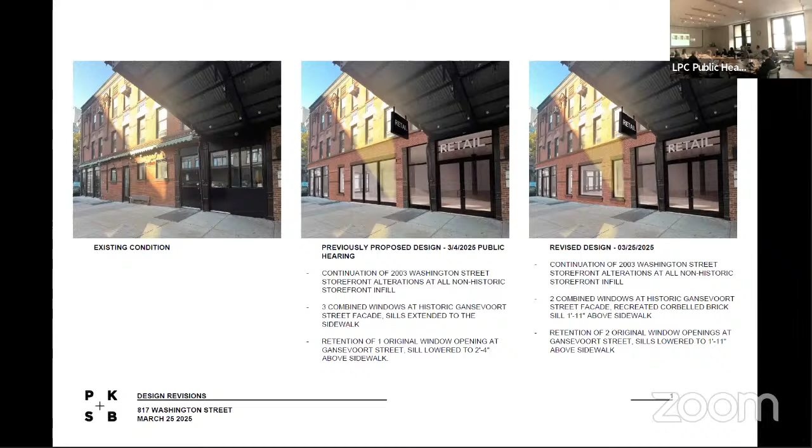We've revised the design per comments received from one of the commissioners at the previous hearing to maintain the 2 flanking window openings, so the heads and detail brickwork are all maintained, dropping the sill down so that it allows for us to retain the corbelling below the sill, and then combining the door opening and the remaining window opening into one display window, and restoring the corbel at the sill at that opening.

And just to quickly go through, again, the building is located at Washington and Gansevoort. And this is important because at the time the district was designated and created, Washington Street was a primary retail and commercial corridor in the district. It connected to 14th Street to a major store, which is no longer there. And the tenancy of Washington has diminished. And the space at the corner here has been vacant for 18 months.

And in the meantime, what you can see on the right side of the district, here is the district bid, and the city created a very prominent pedestrian plaza, which culminates at Gansevoort. And Gansevoort has now become the primary high-end shopping street. And so the purpose of this is to create an opportunity for that bigger tenancy at this corner and proper entrances and display, which match a lot of the other retail along Gansevoort to the east.

And so historically, this was a taller building, which had some commercial spaces and apartments above. This was originally 3 French flats buildings and was converted in the 1940s to commercial. Just again, showing the taller one. And this is during the period of the reconstruction. So you can see the open windows and demolition going on at the ground floor. And the corner, which illustrates the cast iron that was inserted here.

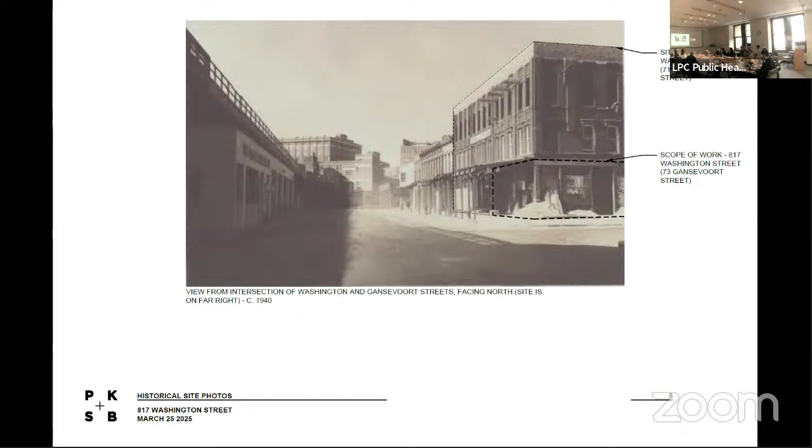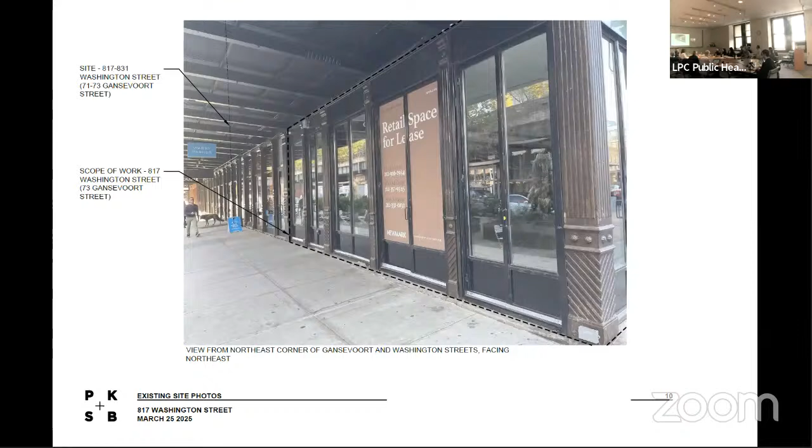And the side street, which tries to show much of what's along this side, and what was there with the roll down gates, which are gone, and the awnings, which are no longer there. And just to briefly comment, the Victorian Society at the last hearing made note of the exposed conduit. That, of course, is all being removed and located inside as part of this. And details, this is the storefront that's being removed. And this is the side of the building with the greatest scope of work.

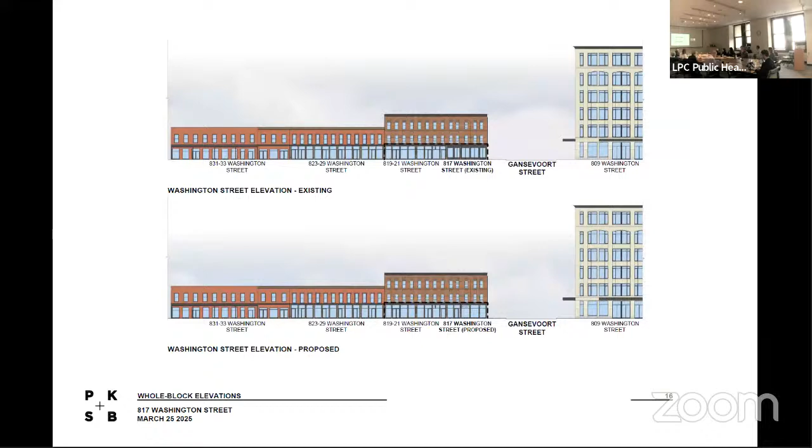There's a marquee. So here are the 4 openings in question with the high sills, the corbelling, the decorative brick between the openings, and lintels. And details of those elements. And the street elevation on Washington. This is what we're proposing, so it just continues what's already there. And on the Gansevoort side, this is the existing, so you can see in the marquee to the right, the infill and the openings, and what we presented last time, and what we are presenting today.

So we've tried to maximize the amount of historic material. We'll be able to maintain the 2 lintels and do a small piece of infill in between them to match at the head of the window, continuing the brick detailing below the lintel in the brick wall sections, and then combining what's already altered, the door, with the window adjacent and dropping the sills down with the corbelling detail. Plan. And this shows one of the reasons for doing this is also to allow for this space to be divided.

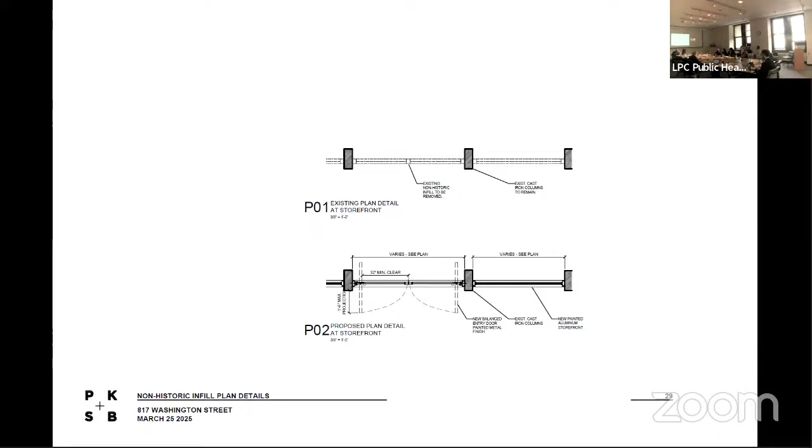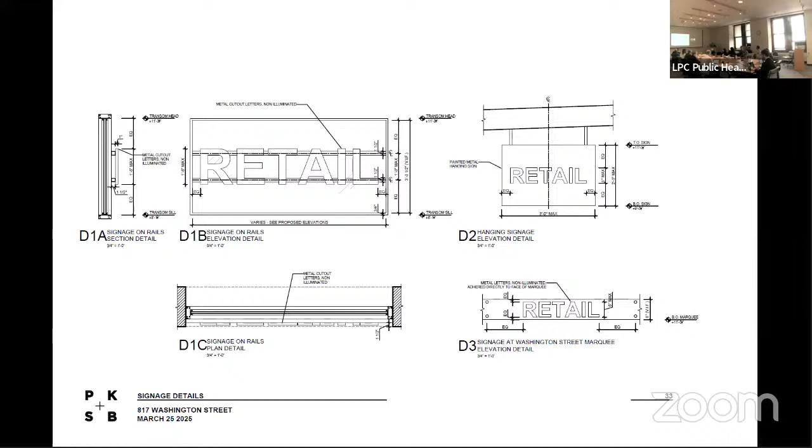And the details. So maintaining the position of the glass and bulkheads with respect to the outer brick wall. And the detail of the corbelling as shown in existing and proposed on the right. And the majority of the signage conforms to the rules. The signage proposed on the lower left is for pin-mounted letters on the front face of the marquee that faces Washington Street for somebody driving by. And this shows some of the other buildings in the district where larger openings have been made from smaller openings in the brick walls. That one was extensive.

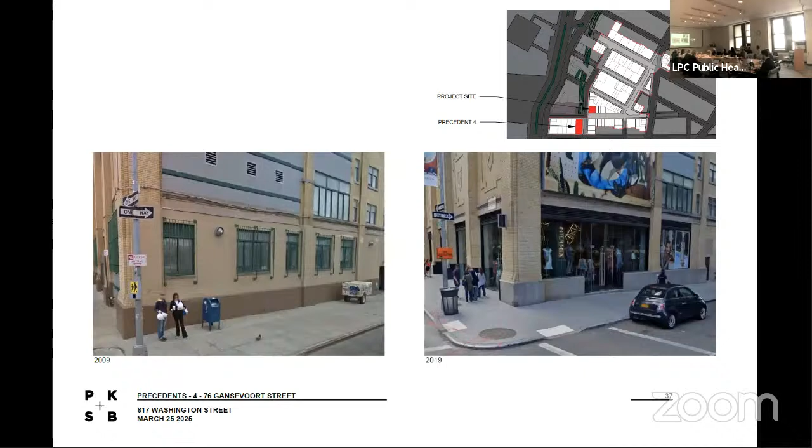And back to us. And this shows the pin-mounted letters on the face of the marquee facing Washington, and up close. And this shows what we previously proposed and what we are proposing today. Sorry for the little vehicle. Photoshop didn't do a good job. And what we previously proposed and what we are asking for approval of today. Thank you. Any questions, commissioners?

No? Okay. All right. I'll now note that Victorian Society of New York did send in a letter on the revised proposal, still recommending denial. So we just saw this last week, so it should be fresh in everyone's mind. And you may recall that there were some comments that the 4 openings should just drop their sills. And then there were other comments, one in particular, that was to drop the sill on the eastern bay to match the western one, and then combine the 2 center ones. And then there were some other comments that were open to looking at other options besides dropping the 4 sills and some variation of that.

And so the applicants are back today, dropping the sill of the eastern bay and then combining the 2 middle ones, keeping their outside line, their lintels, and inserting a piece in the middle. And all of them will have restored corbelling. And just to provide a little context on this particular district, many of you might remember when we designated this district, we recognized that the history of this neighborhood was about change, and that this neighborhood started as a residential neighborhood and then became somewhat entertainment and then industrial and then commercial and then ultimately the meatpacking district. And so through these various waves of reuse, the buildings changed dramatically, and they were cut down to 2 stories.

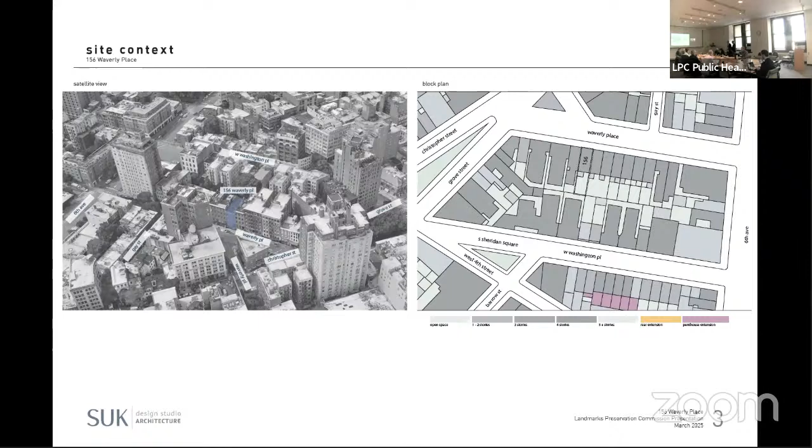Good morning, Commissioners. Anu Kandel, Preservation Staff. The subject property is located on the south side of Waverly Place between Grove Street and 6th Avenue in the Greenwich Village Historic District. This item was initially presented at the January 28th public hearing. The proposed work included installing a stoop gate, replacing windows, constructing a rooftop addition, modifying and reconstructing the rear facade, and excavating the cellar and rear yard. The Commissioners did not object to the excavation scope, but did express specific comments and concerns regarding the remaining scope. No action was taken at that time.

Starting at the front facade, the Commissioners did not object to the presence of a stoop gate, but expressed concerns regarding the design and height. In response to these comments, the historic railings and newel posts will now be restored and the gate redesigned to be shorter and match the reintroduced ironwork. Additionally, the windows were revised to a lighter finish, which is now being reviewed at staff level.

Moving to the roof, the commissioners did not object to the construction of a rooftop addition, but expressed concerns about visibility, as well as expressed objections to the glass railing. In response to these comments, the addition has been modified to address visibility, specifically sloping the roof away from the Waverly Place facade. Additionally, the glass railings have been revised to cable railings.

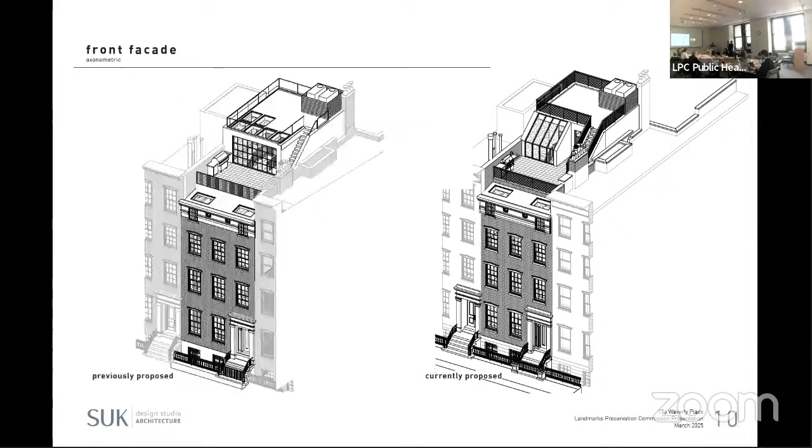At the rear facade, some of the commissioners objected to modifying the upper floor windows. In response to these comments, the fourth floor window openings will be retained. The third floor is still proposed to be modified as previously presented. Additionally, the proposal to reconstruct the rear facade at these upper floors remains as is. And the applicants are here to present the changes and answer any questions after we open the proceedings. Okay, great. Which I've already done, so you may go ahead and speak.

Hi, John Gordon and Bill Suk with SUK Design Studio. So we could start with the stoop gate. We were asked to change it as mentioned, but we found historic photos that were better quality and showed the pedestals that existed originally. So we're restoring that, and all of the railings on the sides of the stoop and the front were mismatched from the historic railings that exist on the areaway. So we decided to replicate to match that and be consistent with that historic photo we found.

And there's 2 or 3 other houses on the road that do have these pedestals on their stoop still. So we feel like it's a very appropriate change to the stoop. So this is the higher resolution historic photo we found, and you can see the existing condition with very mismatched railings, and then the proposal on the far right.

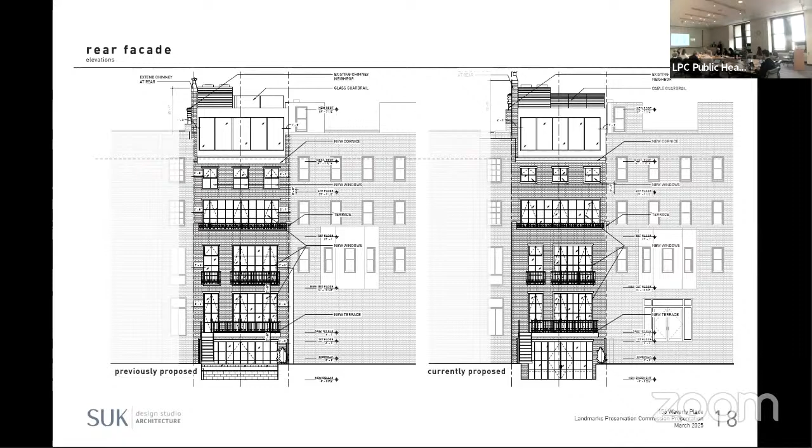So currently, we're proposing to maintain the masonry openings of the top rear floor to the 3 openings, while still keeping the proposal to make a wide opening at the terrace. And that's comparing what we were proposing here in January versus now. And rendering the rear facade, comparing the old rendering, the new rendering, plans.

And then as mentioned, the bulkhead has been revised for less visibility. We'll get into the visibility here in a second. So directly across the street, no real change there. It wasn't very visible. Here you could see the comparison from what we're calling view B, close to the end of the dispensary. You can see a slight bit, but the new mock-up is there on the top photos, and then the rendered and the blow-up on the bottom there.

And then this is comparing the rendering we proposed in January versus today's rendering. You can see the reduced visibility with that sloped roof. And then further back, just comparing the mock-up photo to the current mock-up, it's much less visibility. View C is further back, across the street from where we were in the previous view, so a larger vantage point. You can see the change in the visibility there.

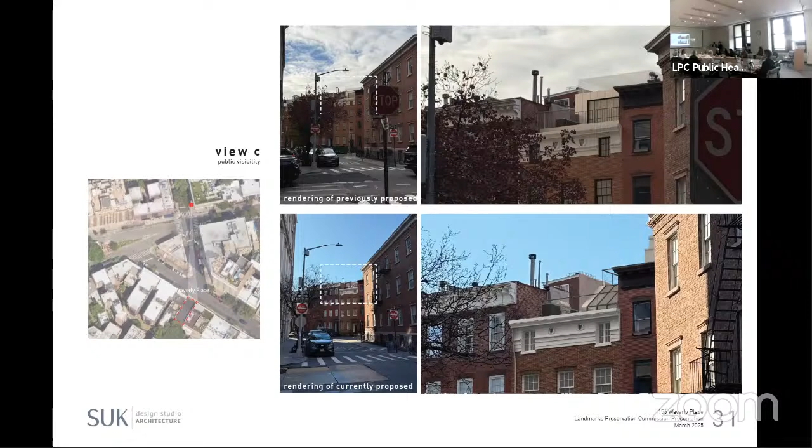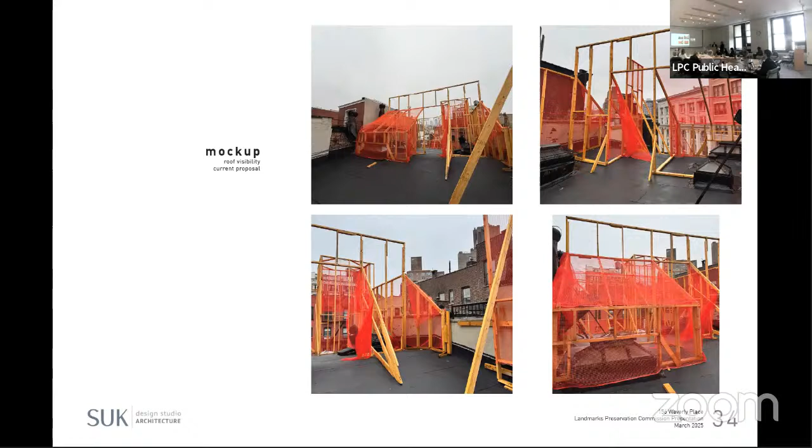And then comparing the old rendering from that spot to the new rendering, reducing the visibility quite a bit. And then the photo comparison from that spot of the mock-up to the new mock-up, old mock-up to new mock-up. And then there's no visibility really here from this angle. And then you could see these are the photos of the mock-up when you're standing on the roof, so you can see like the shape of it comparing to what we've modeled on the old mock-up.

Thank you. All right, thank you. Do we have any questions, commissioners? Yes, Commissioner Jefferson. I have one architectural question. In the rear facade, the front facade, the window frames are white. In the back facade, you made them black. And then you have the lintels that are white. And I'm just curious, why the change? You didn't hear me? Oh, it was hard to hear, sorry.

The question is that on the front facade, I know last time you proposed a black color and the commissioners all mostly felt that a white color would be more appropriate because of the cornice and the other details. And so the question is, on the back, you're proposing a black window system with white lintels, and what was the thought behind that? I think the lintels were intended to be like a masonry type material over the openings. So it's like appropriate with the brick.

So you're asking about the lintels? Can you hear me now? Yes. Yeah, okay, the question is, the window frames in the back are painted black and your lintels are white. And I'm just asking why the change, and the front frames are white.

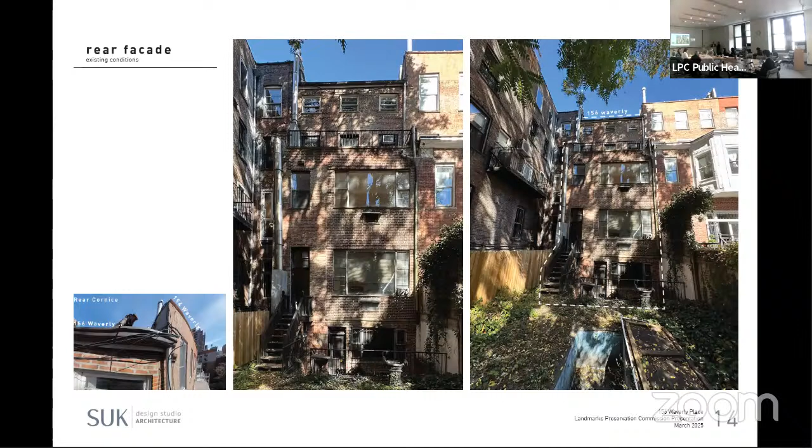I'm trying to understand exactly why the rear yard roof bulkhead is as tall as it appears to be, 12 feet above the new roof height, and it looks like it's mostly double height space. Is there a reason why that is installed? The main logic is you come up the staircase and then you come out the door, so you need height clearance at that area. And we just kept it as one roof for the whole thing.

So is the clearance there like 9 feet, and you have a 12? Yeah, it's 12 feet from roof level to roof of bulkhead. So is that like an 11-foot clearance? No, it's definitely not 11. So it says bulkhead, I'm sorry, bulkhead is 49.9 and so it's 10 feet. So yeah, we're being like a 9-foot clearance.

Is that the idea? I mean, the roof structure over the top on any of the roof structures we're adding, they're nearly 2 feet thick because we're doing lots of insulation and a foot of structure, and so there's a lot of layers to it. So it definitely comes down quite a bit. Okay. Thank you. Commissioner Master.

Yeah, can you speak to the front stoop gate? I think that you had said that you were trying to replicate the historic front gate. Is that true? What was your inspiration? Go back to that slide here. So the existing gate and the railings on the side of the stoop are not matching what's on the front of the areaway and don't match the historic photo. We feel the historic photo demonstrates that what's in front of the areaway was the historic. It's still there now, and we'd like to use that as our inspiration for the entire stoop.

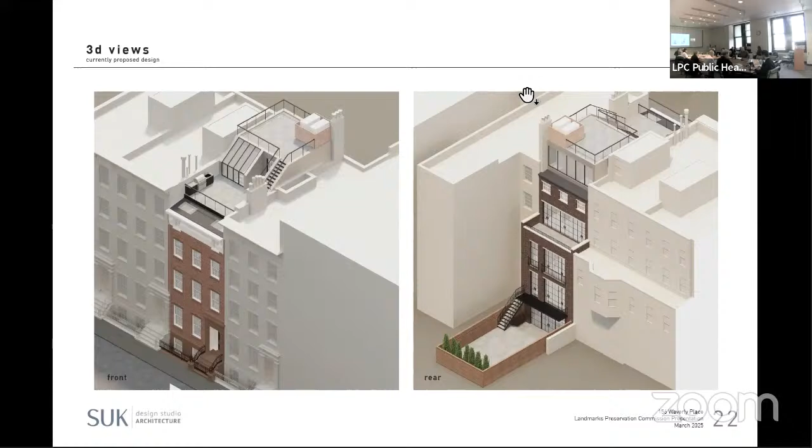Okay, Commissioner Jefferson, would you second that motion? Second. Thank you. Mark? Chair Carroll, aye. Commissioner Bland, aye. Commissioner Chapin, aye. Commissioner Chen, aye. Commissioner Ginsburg, aye. Commissioner Goldblum, aye. Commissioner Jefferson, aye. Commissioner Lutfi, aye. Commissioner Master, aye. With 9 in favor and none opposed, the motion passes. All right, please continue to work with the staff. We'll move to the next item.

Right, the next item is public meeting item number 3, LPC 24-08751, an application for a certificate of appropriateness in the Borough of Manhattan, block 1144, lot 105, 167 West 72nd Street in the Upper West Side, Central Park West Historic District. This is a store and apartment building originally built as a row house in 1883 to 84 and modified in 1909 by E. Wilbur. The application is to legalize the replacement of windows installed without LPC permits.

We read this into the record at a public hearing of March 11th, 2025. So this will be presented today for the first time, and the applicant will go through the proposal after we open the hearing. Okay, great. Thank you. Commissioner Lutfi, would you make a motion to open the hearing? Thank you. Commissioner Jefferson, would you second that motion? Second. All in favor, say aye. Aye. Any opposed? Okay, the hearing is open. Sorry, I missed. How do I?

Yeah. You can just use the keys to... Is the arrow? Ah, okay. Thank you. Thank you.

Good morning. My name is Alessandra Nehudil, and I'm here as the new owner and representative of 167 West 72nd Street. And I am here to request and propose that the current double hung 1/1 windows at 167 be legalized for the remainder of their natural life.

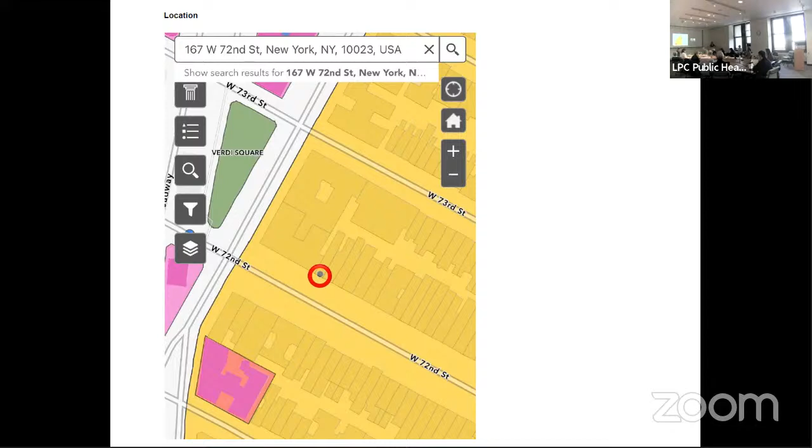This is the location on the Upper West Side. This is the Landmark West preservation designation. Sorry. Whoops. Okay. Missed a slide, but that's okay. And this is the Landmark West description. And here are some historical images. We have the tax photo from the 1940s.

And 167 West 72nd Street was originally constructed as neo-Grec, and it has been refaced a number of times. The current style of 167 West 72nd Street is not clearly identified in the Upper West Side Central Park West designation report, though preservationists today have approximated its architecture to be close to 20th century commercial and neo-federal. However, if you look up the property on Landmark's preservation website, you will see that it still is categorized as neo-Grec, which is important to me because 1/1 windows are appropriate for neo-Grec architecture and designations.

From the designation photo, it is apparent that the 5th floor, is this the right window? Here we go. From the designation photo, it's apparent that the 5th floor has had double hung windows since at least 1990, the top floor. And if anyone is familiar with, oh no. Oh, this is my old, that's why. I had sent a new, that's okay.

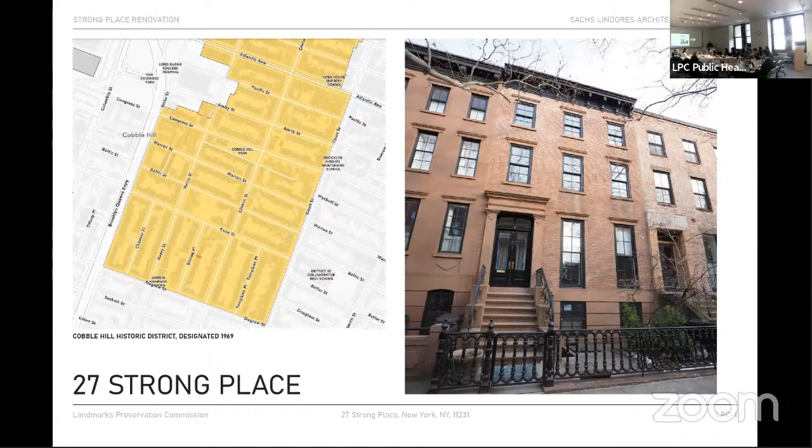A view along the streetscape: 27 Strong Place is near the center of the photograph. It was constructed in the 1840s. The designation report doesn't have precise dates, but from a variety of sources, our understanding is it's late 1840s. And it was built as a row of 3 houses, 27, 29, and 31 Strong Place, which were built together. The buildings to the left, the brownstone-clad buildings, were built a bit later.

A summary slide here, axonometric on the left is the existing, on the right is the proposed, and a few things to point out to you. So the scope of work that's before you today is replacing the 2 leaves of the front door, which are worn, and you'll see there's some detailing that has led to their degradation that we're looking to replace. The historic transom would remain. On the roof, we're proposing a setback rooftop addition, 1-story addition with chimney extensions clad in brick, and you'll see in a bit in the presentation these visible brick-clad chimney extensions are actually quite characteristic of the streetscape, and the addition.

And I'll just point out that the house two to the south, which is 31 Strong Place, had a very similar scope of work on the roof, rooftop construction, chimney extensions. That was approved by the commission in 2022 and constructed, I think, in 22 and 23.

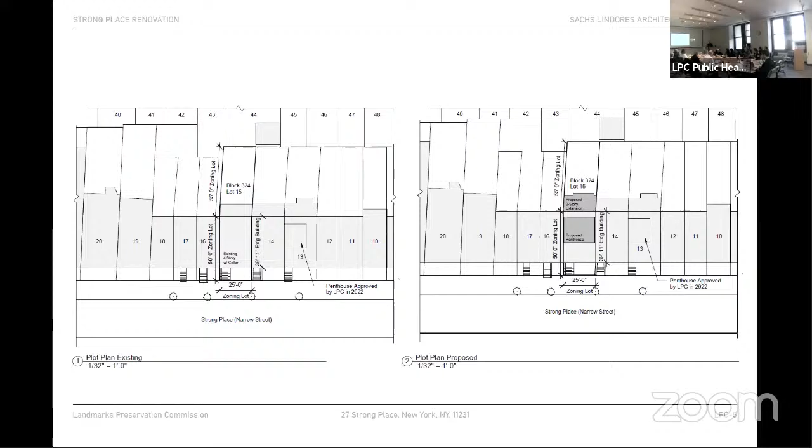A site plan, a couple things to point out here. One thing to note, not only the sort of irregular geometry of the lot, but these are deep lots. The ones including 27 Strong are 105 feet deep, somewhat deeper than is typical. And then you can just see the footprint of the surrounding buildings in the row, and a block plan later in the presentation will show you the sort of prevalence of 2 and even 3-story extensions.

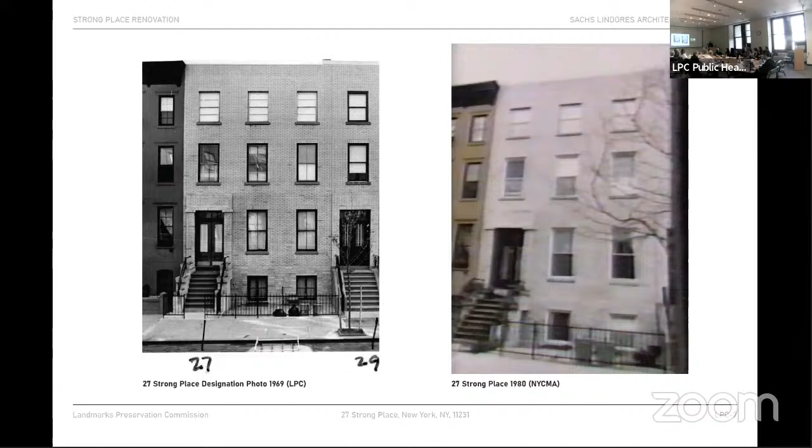Some historic maps just showing the development of the block. You can see sort of through the 19th century, the block was filled in with a series of row houses, as is typical for the Cobble Hill Historic District. And the tax photo on the right shows the building in its condition approximately 100 years after its construction, largely intact. At the time of designation, the front of the building had been overclad in a light-colored brick, same at 29 Strong Place. And then the 1980s tax photo on the right shows the same condition, stoop remaining, but the overall facade had been overclad. And all of that was taken back, and the facade was restored about 25 years ago under staff review.

And some photographs of the existing building as it appears, overview on the left, details of the upper portions of the facade, and the areaway on the lower right, so you can see the current conditions of the house. Roof photos, skylights, vents. You can see the chimneys on both sides of the house are masonry clad. And then looking, this is the view from the south. This is the addition at 31 Strong Place. And there were chimney extensions in metal that were approved as part of that commission approval from a few years ago.

Turning around now to the back of the house, again, 27 is in the center of the photograph. The 3 historic buildings in the row were 29 and 31. You can see 31 has been completely rebuilt. The back of that house, too, previously was clad in stucco, as is the back of the house at 27 and 29, all with 2-story extensions off the back of them.

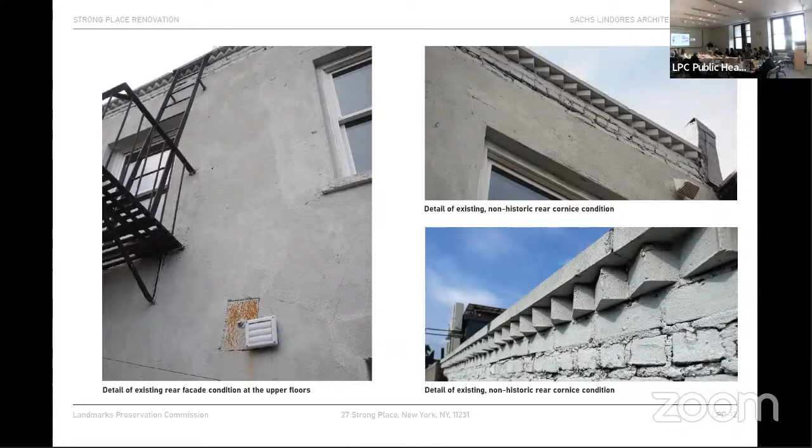And some detailed photographs of the back of the house, a fire escape ladder off the back, second and third floor onto the roof of the extension. And you can begin to see some of the realignments of openings that have been made over time on the back of the house. Some details here: cracking, reconstructed parapet with cast concrete coping. Window alignments on the second floor in particular that have been altered, but we have a good sense of where the historic openings were, both from the building at 27, but also from its neighbors at 29 and 31.

Comparative street elevations, again, the replacement of the two leaves of the front doors, which we'll talk about in just a minute, a modestly scaled addition at about 9.5 feet from the roof level to the roof of the addition, and the raised chimneys seen in elevation. Turning to the door, so the existing two leaves of doors, you can see the mail slot was cut through the bottom rail of the left panel, and the proposal is to basically replace the doors in kind in wood, but to insert the mail slot on the taller, heavier bottom portion of the bottom rail.

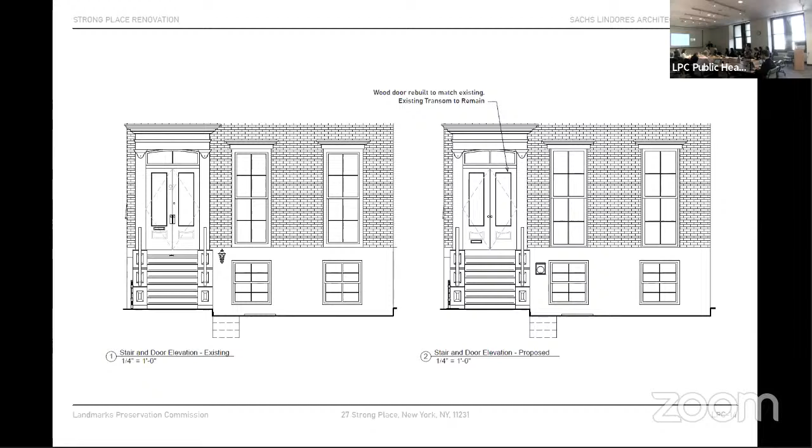The transom will be retained. We've got details illustrating the sort of one-for-one nature of the replacement. Some photographs. The transom, as I mentioned, will be retained, and the two leaves of the doors will be replaced with a mail slot set at a slightly lower elevation on that left panel. Some detailed photographs just showing the wear on these doors and a desire to have sort of clean, fresh, better quality or higher, better conditioned doors with that mail slot a little bit lower on the panel.

Flipping around to the rear, so an existing elevation on the left and proposed on the right. As I mentioned, the upper floors would be reconstructed in brick. We've got a sample board here with a brick and mortar that's proposed, cast stone lintels and sills, the addition above, and then the reconstructed two-story extension at the lower portion, sort of a lower basement level, and then a parlor level at the back of the extension.

Same elevation with dimensions. The dimensions of the masonry openings will be consistent with what's there today. We've added the dimensions in to indicate the size of the openings, the placement on the elevations that will be consistent from what is there today to what is proposed. And then the extension below. The windows on the upper floors will be in wood, double hung. The windows in the extension will be steel, painted in accordance to the finished samples here.

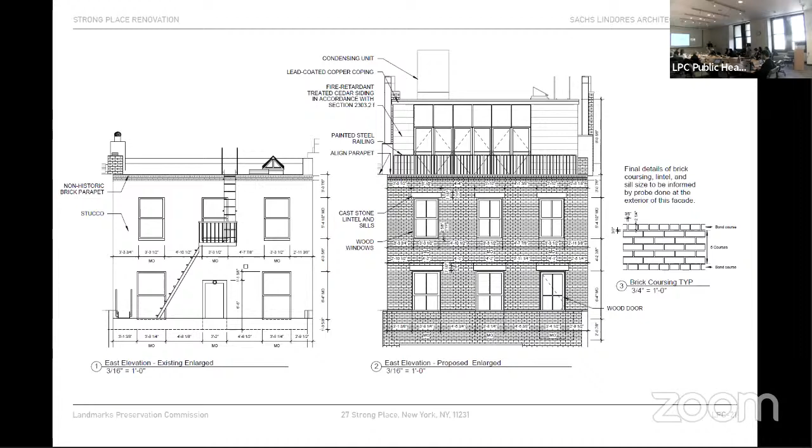Again, some details on the upper portions of the facade indicating what we anticipate to be the historic bond, which is just a common bond. We'll uncover that when we peel back the stucco off the back doing probes. But again, you can just see the regularity of the elevation, common bond, red brick with cast stone lintels and sills in the addition above. Some details at the base of the building, again, steel windows, painted spandrels, and brick elevation, heavy brick piers framing the openings and giving it a real sense of substantialness.

An existing section through the building, the heights on the front of the house and the back of the house are unchanged. I'll just point out the slope of the roof and also the height of the room in the back of the top floor. At 8'3", there's not a lot of head height at that elevation. We're rebuilding the roof to set the addition down into the body of the building, but we can't push it down much further because of the head heights. We're already reducing that by about three inches, just given the arrangement of the rear elevation.

So again, the back of the house remains at the parapet at 39 feet 4 inches. The overall height of the addition is 9'9" with an interior height of 8'10", and it's set back almost 17.5 feet from the front of the house and about 5 feet off the back of the house. So the historic volume of the building is clearly legible. And then you can see at the base of the section, the extension of the building off the back of the house with a limited amount of excavation directly below the extension.

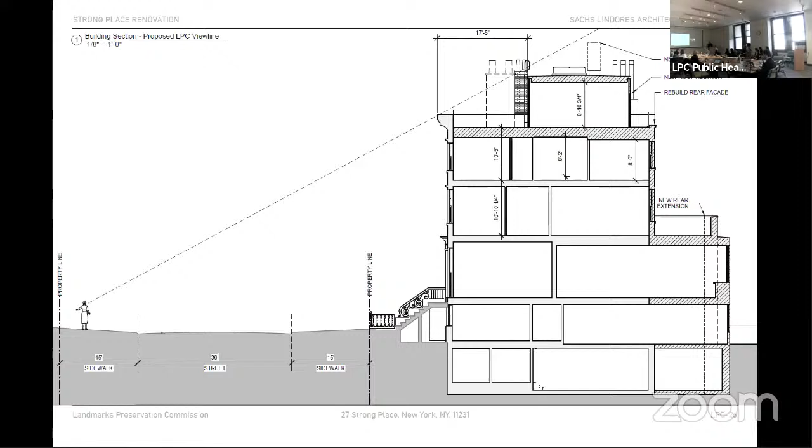Sightline diagrams just illustrating the view from across the street. The proposed sightline just illustrates that the tops of the chimney extensions are visible. The addition is not visible. The rooftop mechanicals are not visible. The only element that's visible from across the street is the top of the chimney extensions. Some detailing of the addition. It'll be in a fire-retardant cedar finish as per the material board. Infill will be steel and glass windows and other details illustrating the lead-coated copper coping.

A series of details here of the back extension, the brick cladding across the back of the elevation of the building, the corbelling across the top of the elevation. As we know right now, the corbelling that's there today is non-historic. It's clear from the materials and the detailing. It's a sort of dogtooth detail. The detailing at 31 is a sort of more regular dentil-like corbelling. We're proposing sort of a combination of the two.

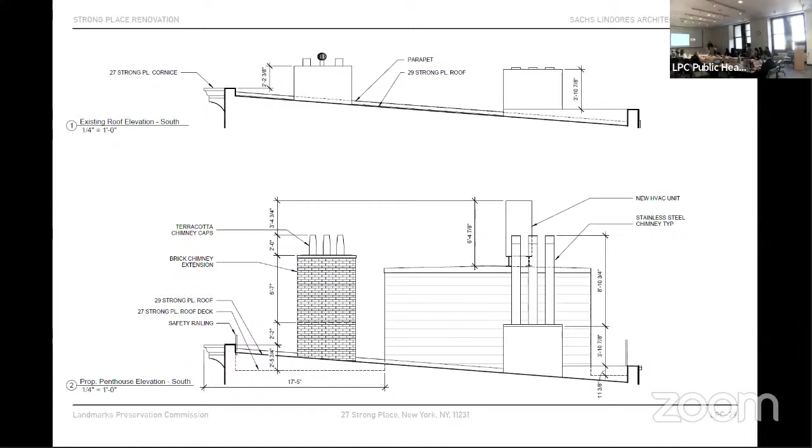We don't know what was there historically, but we feel like this is an appropriate design for brick corbelling across the parapet at the back of the elevation. Some comparable elevations at the roof, just illustrating the various elements, the chimney extensions. The chimneys at the front of the house would be clad in brick. Those in the back would just be pipe or chimney extensions, just the metal extensions, and then you can see the scale of the addition with its setback from the front of the house.

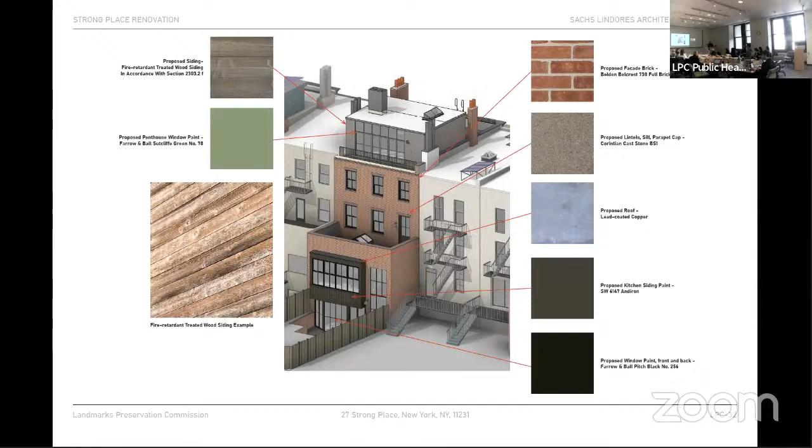Flipping around to the other side, similar details and elements on the roof, and then material samples, terracotta chimney caps, a Belden brick for the cladding of the chimneys, and then various cladding materials for the rooftop elements and finish for that. Flipping around to the back, similar set of materials, Belden brick across the upper portions of the facade and the extension, cast stone for lintels and sills, and color samples for the windows and the infill elements.

Sightline and visibility studies. This is a view of the building. So this is directly across the street. On the left is the view with the mock-up. On the right is the rendered view. And as I mentioned, the chimney extension will be visible. It's clad in brick with a terracotta chimney cap.

And then as you move up and down the street, this is now looking south down Strong Place. Mock-up view on the right and rendered view on the left. These chimney extensions are visible, but as you'll see in just a moment, this is actually almost a character-defining feature of the district. You see this quite a bit up and down the streets.

This is a view looking north now on Strong Place. So just through the trees, this view will disappear soon. This is the extension of the chimneys here. These are the commission-approved metal extensions as part of the 31 Strong approval from a few years ago. We think actually that the brick is sort of more sympathetic to the streetscape and what you see in the immediate area.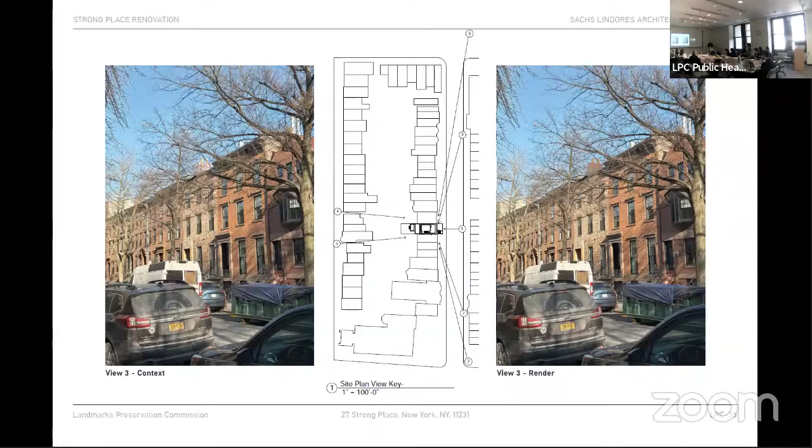This view now looking north from DeGraw, again, it's visible through the trees. We included it because you can see it from this perspective, but very difficult to discern. Similarly, looking south from Kane Street, you see this through the trees, but part of the streetscape.

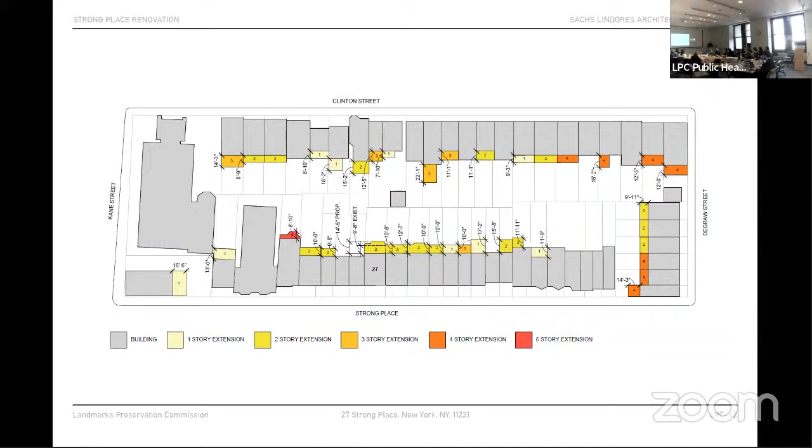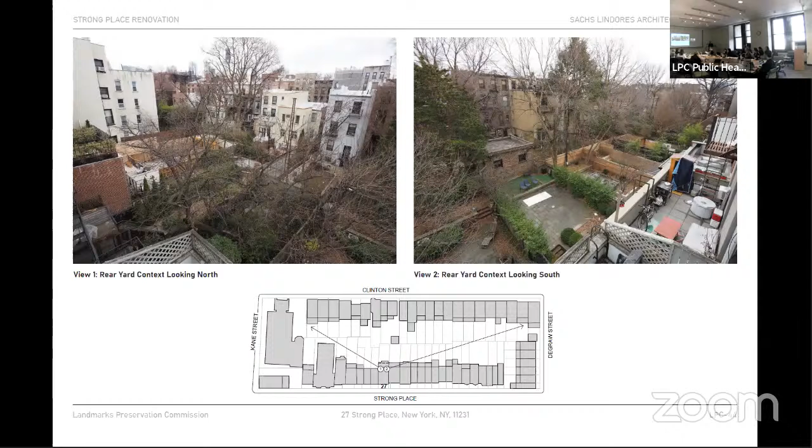Photos from the roof, again, just illustrating the range of extensions off the back of the house. So this is existing view looking north on the left and south on the right, and then kind of an overlay here showing what the heights of those relative extensions are off the house. So the 2-story extension we're proposing is very much consistent in height with what's around. As I said, there are 2, 3, and 4-story extensions throughout the block.

And now just a series of plans at the cellar. There's a bit of excavation work underneath the extension. We've been working with the staff on that. That's not part of the commission review, but we share it with you here.

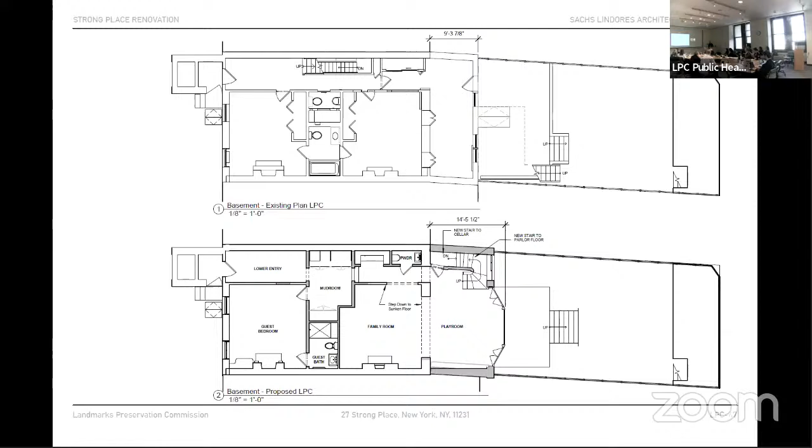And then a plan at the basement level, so you can see the reconstruction of the extension a few feet deeper than the existing, but in proportion of the overall lot, again, I mentioned it was 105 feet. In proportion of the overall lot, there's still quite a bit of green space in the back of this lot, and then throughout the block, given the extensions that exist.

Detail roof plan, and then finally, just to conclude, proposed axonometrics on the front and the back of the house. The addition, as I mentioned, is not visible from the surrounding streets. The chimneys are typical of the district. And then across the rear, reconstructing the upper portions of the elevation in brick, aligning it with the adjacent buildings. The windows will align as they do today to sort of establish and maintain that relationship between the 3 houses

across the historic row. And then the rear extension clad in brick with painted metal and steel window infill, proportionally appropriate for the building. Slightly deeper than its adjacent neighbor, but we think in the context of this deep lot can be appropriate. And I think collectively, rebuilding the back of the house will ensure the building's long-term preservation as part of this overall project.

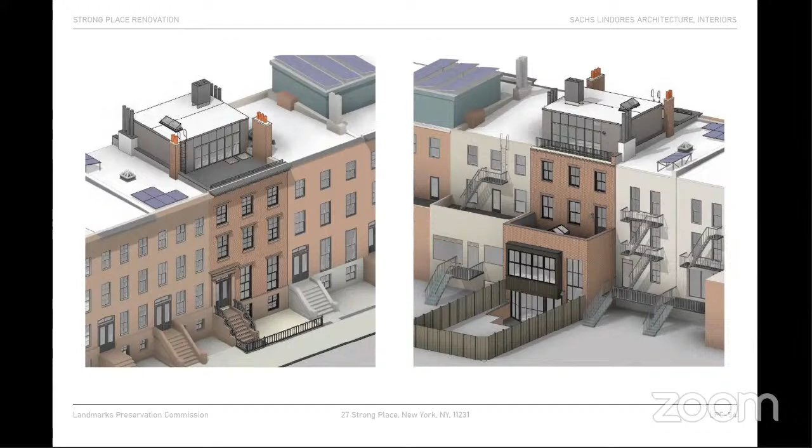Hi, Commissioners. My name is Lucy Levine. I'm speaking on behalf of the Historic Districts Council. HDC believes that the depth of the proposed rear extension should align with its neighbors. Thank you. Thank you. Anyone else joining via Zoom who would like to speak, please use the raise hand function. Seeing none, I will note that Brooklyn Community Board 6 recommends conditional approval provided that the rear yard extension matches the depth of the original extension and for the HVAC units to be smaller.

Okay, thank you. Would you like to respond to the comments? Just quickly, regarding the depth of the extension, I think what's important in terms of maintaining the continuity of this row is up at the upper floors of this building. The second and third floors, and that consistency now in brick, but also the alignments of the windows and the size of the windows, that relationship is clearly established by the work on the upper floors. The commission has allowed variability in design and geometry and volume to extensions.

This first level of the extension, the basement level, much of it is actually hidden by the fence because much of it is below grade. As we mentioned, it's a 1'10", 22-inch difference. It makes a difference to the layouts of the interior. Obviously not your purview, but thinking about appropriateness, thinking about the relationship of the houses, these upper floors really maintain the reading of the historic volume, and some variation in the extension could be found appropriate based on different designs and needs on these working sides of the lower floors of the building.

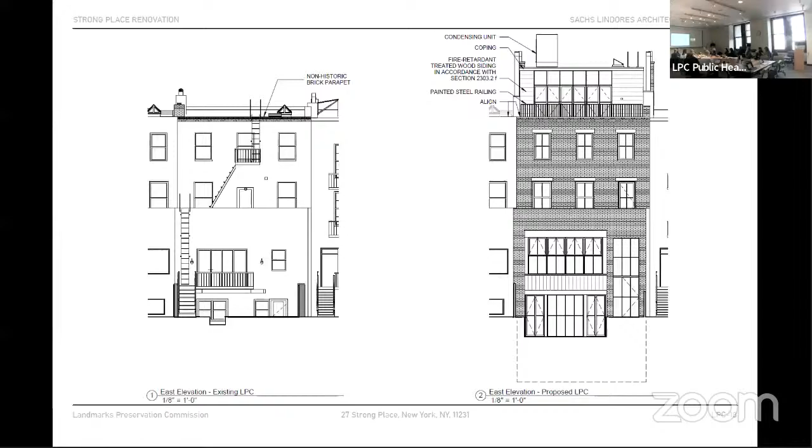PC-18. The rear facade, I think you did a great job on the rear facade. But the bay window coming out at the basement level, you have the walls cutting in, and then on the parlor level you have it flat. And then on the right-hand side, you have this window. And the composition just falls apart for me there for some reason. I mean, that's not our purview, but I'm trying to figure out how you would fix it.

Sorry, let me just go back, and I may have Kevin, because this is Kevin's design, but I think it's really about bringing daylight into the interior. Again, the lower portion is at the basement level. Kevin, if you want to speak to the ideas behind it. So that's where the stair is. We moved the stair back there, and we wanted to bring the window up, so when you walk in the front door, you look out, you get that sense of light in the back. That's why the window is as tall as it is.

But I also think the house 2 buildings over has something similar, right? Doesn't it also have a vertical window? It's very tall at 31. Yeah, here, let me, we have this in the elevations, right?

Oh, I see. It's, I mean, brick. Yours is better in a way, but it's not there yet, but this is just my opinion of design. All right. Other questions? All right, let's move to our discussion.

Commissioner Goldblum, would you make a motion to close the hearing? So moved. Commissioner Ginsberg? Second. All in favor, say aye. Aye. Any opposed? All right, the hearing is closed.

So we're looking at this application for a rooftop and rear yard addition. It also includes reconstructing the top 2 floors, for which we've received an engineer's report explaining need and methods. And I think it also includes replacing the front door as well, right? Okay. Vice Chair Bland?

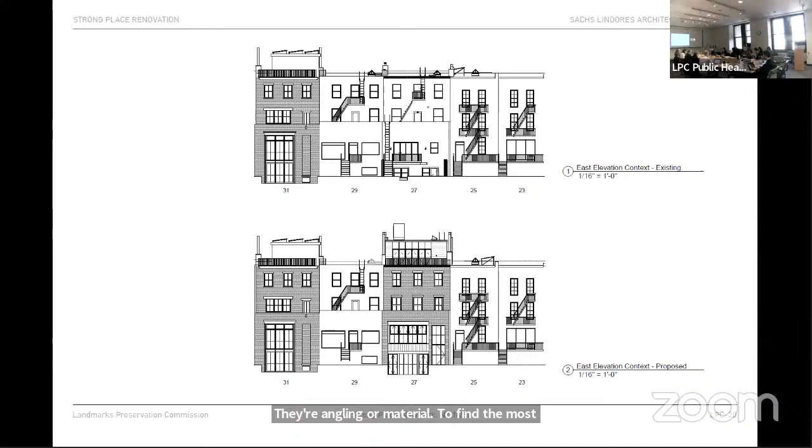Okay. In the matter of 27 Strong Place in the Cobble Hill Historic District, this is an application to replace entrance doors, construct roof and rear yard additions, and reconstruct the rear facade. I note that the building style, scale, materials, and details are among the features that contribute to the special architectural and historic character of the Cobble Hill Historic District.

I recommend approval, noting that the new doors will match the historic doors in terms of materials, details, operation, configuration, and finish. That the proposed rear yard addition will be only minimally visible at a distance through a small alleyway on Clinton Street. That other rear yard additions with similar height and depth exist within the block, and that the proposed two-story rear yard addition will be modest in scale and will not overwhelm the building, adjacent buildings, or the block's central green space.

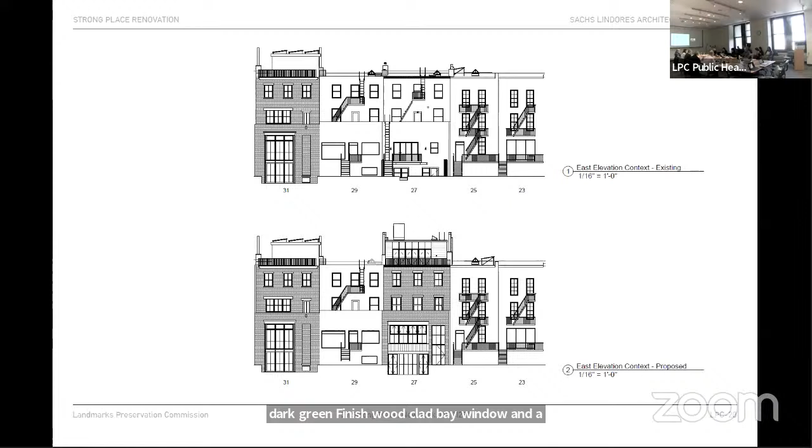That the proposed design and materiality of the rear yard addition, featuring red brick cladding, a projecting dark green finished wood-clad bay window, and a black finished steel multi-light window and door, will be in keeping with the scale and residential character of the building.

That the original rear facade has been previously altered by the installation of stucco cladding and is in poor condition, which will be exacerbated by the construction of the addition below. Therefore, its reconstruction in brick with cast stone lintels and sills is warranted and will bring the building closer to its historic appearance.

That the upper stories of the rear facade will be reconstructed in its existing plane, aligning with other rear facades in the row and matching its existing height and fenestration, featuring corbelled brickwork at the cornice, recalling the treatment at historic rear facades. That the rooftop addition will be set back from the front and rear facades, maintaining a sense of the building's historic massing. That the rooftop addition will not be visible from any public thoroughfare.

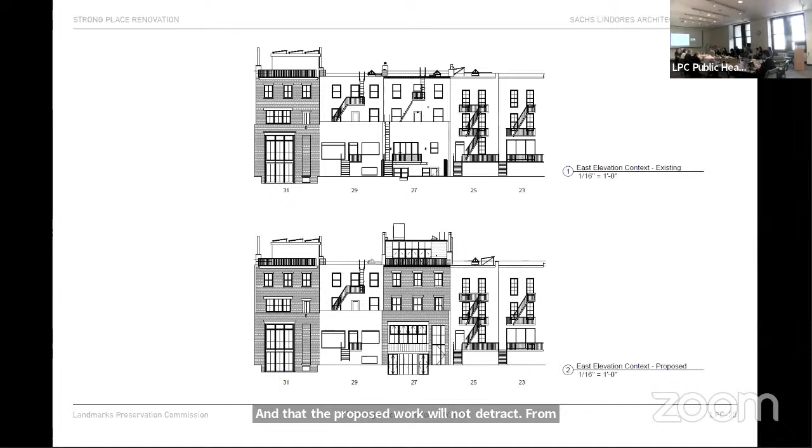That the simple design and typical materials of the rooftop addition, featuring brown finished wood, clapboards, and metal windows and doors, will be in keeping with the character of other rooftop accretions within the historic district, and that the proposed work will not detract from the special architectural and historic character of the building or the Cobble Hill Historic District. Furthermore, I recommend the applicant work closely with staff to explore ways by which the visibility of the chimney can be reduced. All right, thank you.

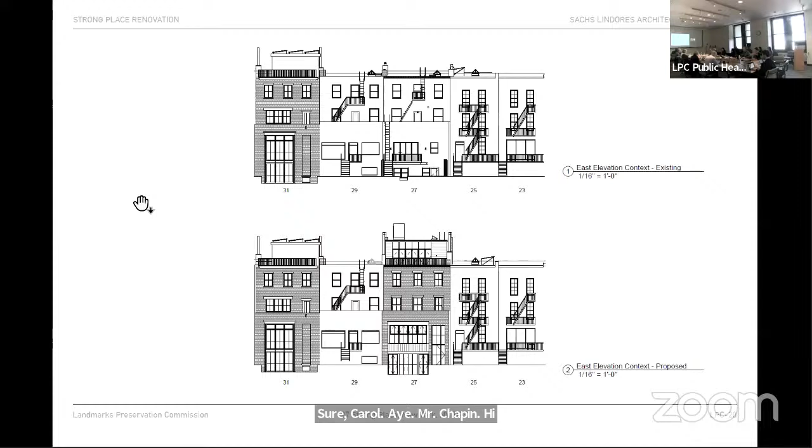And Commissioner Chapin, would you second that motion? Second. All right, Mark, will you call the vote? Chair Carroll. Aye. Commissioner Bland. Aye. Commissioner Chapin. Aye. Commissioner Chen. Aye. Commissioner Ginsberg. Aye. Commissioner Goldblum. Commissioner Jefferson. Aye. Commissioner Lutfi. Aye. Commissioner Master. Aye. 9 in favor, none opposed. The motion passes. Approved. Thank you. We'll move to the next item.

Next item is public hearing item number 2. LPC 25-05217. An application for a certificate of appropriateness in the Borough of Brooklyn, block 292, lot 13, 168 Pacific Street in the Cobble Hill Historic District. This is a Greek Revival style house built circa 1835 to 36. And the application is to construct rear yard and rooftop additions and to replace windows.

Please go ahead. Good afternoon. My name is Peter Guthrie. I'm the owner and designer of this renovation of 168 Pacific Street. And if you're ready, we'll jump right in. 168 Pacific Street between Court and Clinton. This is the front facade. Greek revival, mid 1830s, probably 1835, 36. We're not sure exactly. These are the historic photos. We're proposing to basically keep the 6/6 and change the paint color and put a gate in the front, and I'll take you through that.

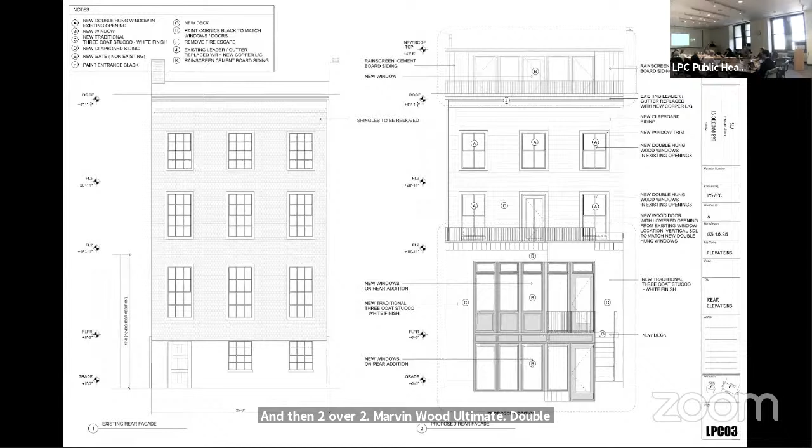Existing elevation to the left, proposed to the right, showing the rooftop extension proposed. Rear elevations, left side existing, right side proposed. Shows the rooftop addition and the lower 2-story addition. The idea is to keep the rear facade on the upper 2 floors. And we've uncovered that it used to have clapboard siding, so we're proposing to install wood clapboard siding, cedar, and we'll paint it, and it'll be on a rain screen. Going to remove the existing shingles and do some waterproofing, and then slight purlins and attach the cedar clapboard, and then 2/2 Marvin wood ultimate double hung windows with 1 door in the middle. All the windows are the existing openings to remain.

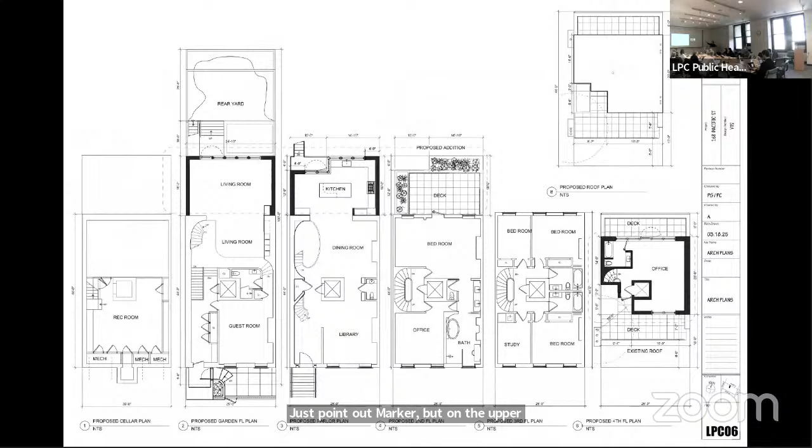Section existing left, proposed on the right. That's the section cut all the way to the east side. Existing plans, proposed plans. The dark poche shows the additions in the rear, proposed, and the rooftop addition all the way to the right. Just to point out, on the upper right hand side, you could see how the roof jogs a little bit. That is mostly because of a 10-foot radius that we're keeping from the neighbor's flue to not raise that flue, which we thought would create more visibility from the street.

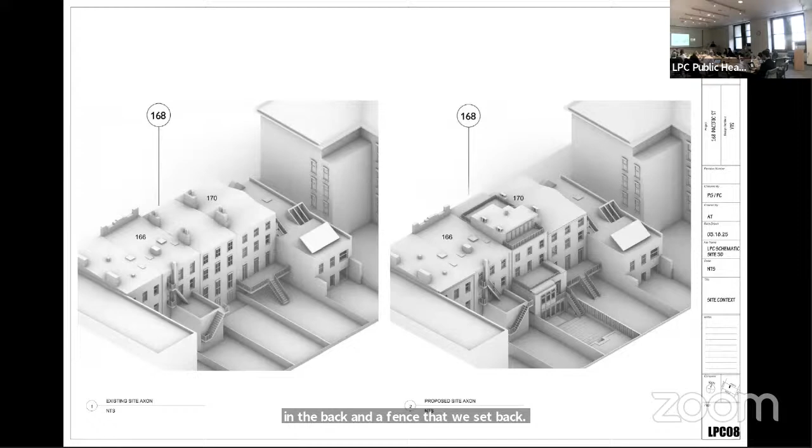Proposed on the right, existing left, shows the rear addition in the back, 2 stories, set back slightly, it has a jog in it, and you'll see that in plan. We thought that would be a little bit more sensitive for our east neighbor who we're in good contact with. They're elderly and we have a good rapport, so I want to keep that going. And the rooftop is just showing a fence in the back and a fence that we set back to the fireplaces, again, to remove any possibility of visibility.

The top addition is clad in a concrete board, charcoal color, and the flues are terracotta. We're gonna have to raise 2 courses of brick and then just repair that cap and then add one of the terracotta flue liner sections. The other portion, in lieu of raising those chimneys up, we would have to raise them above our roof, and that would create another component of visibility. We decided that we could angle them over and incorporate them into our building. We thought that would be more sensitive.

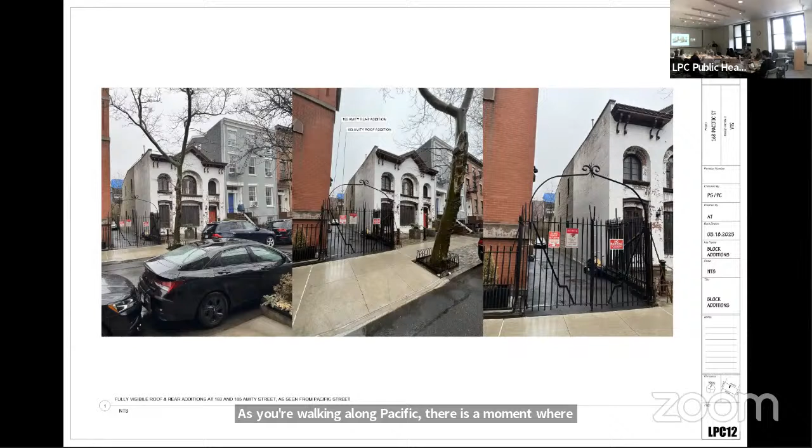And there's one existing, the neighbors. As you're walking along Pacific, there's a moment where you do see that building. That's the tarp building on Amity Street, and you do see the full extension of the building, just to give a sense of context of other things that are going on in the neighborhood, and one that was approved at this body. No visibility from the front, no visibility from the west side.

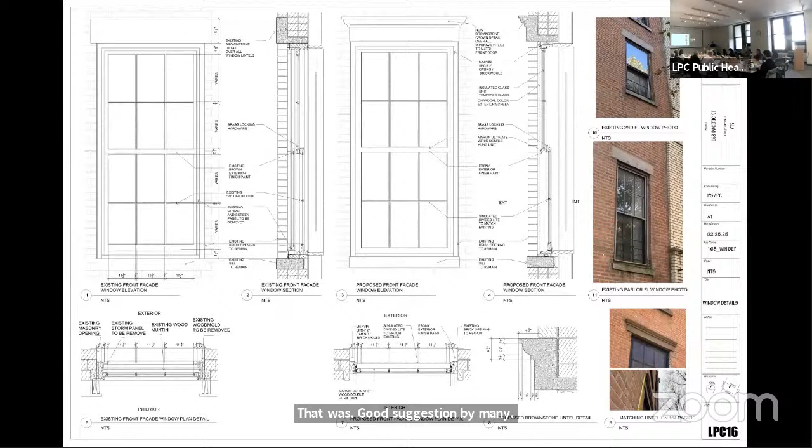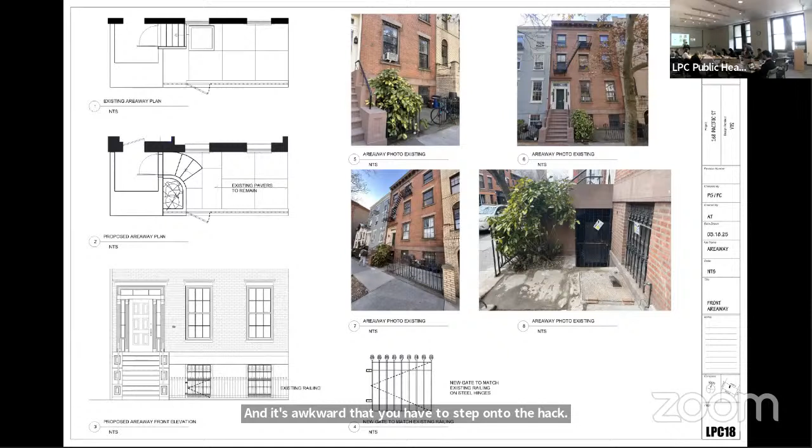Okay, that's it. All right. Thank you very much. Do we have any questions? Yes, Commissioner Jefferson. The rear facade is wood shingles, correct? And the new facade is what? The upper portion of the new facade is clapboard. It's a wood clapboard siding. So this portion is clapboard siding. This portion is a white stucco. What we do is a three-coat stucco system, and then we do an elastomeric paint over top of it. You're welcome. Other questions?

All right, let's see if we have any public testimony, and I'll note that there is no one in the hearing room to speak, so I will turn it over to Stephen to see if we have any remote participants. Anyone joining us via Zoom who would like to speak, please use the raise hand function. Seeing none, I will note that Brooklyn Community Board 6 recommends approval. Thank you. Okay. All right, so supportive testimony. Is there anything else you'd like to say before we move to our discussion? Okay, and any final questions, commissioners? No, and Corey, did you see my question too? Okay.

All right, so let's make a motion to close the hearing. Commissioner Ginsberg, would you make a motion to close the hearing? Thanks. Commissioner Chen, would you second that motion? Second. All in favor, say aye. Aye. Aye. Any opposed? Okay. So we're looking at this as a proposal again for a rooftop and rear yard addition, and to reclad the upper floors in a clapboard.

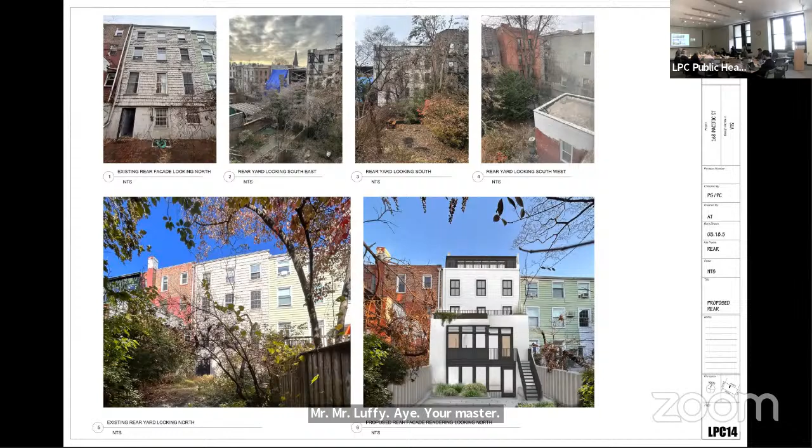Second. All right, Mark, will you call the roll? Chair Carroll, aye. Commissioner Bland. Aye. Commissioner Chapin, aye. Commissioner Chen, aye. Commissioner Ginsberg, aye. Commissioner Goldblum. Aye. Commissioner Jefferson. Aye. Commissioner Lutfi, aye. Commissioner Master. Aye. 9 in favor, none opposed. The motion passes. That's approved. Thank you. And we'll move to the next item.

Next item is public hearing item number 3, LPC 25-03773. An application for a certificate of appropriateness in the Borough of Brooklyn, Block 307, Lot 31, 220 Court Street in the Cobble Hill Historic District. This is a row house built in the early 1850s. The application is to construct a rear yard addition.

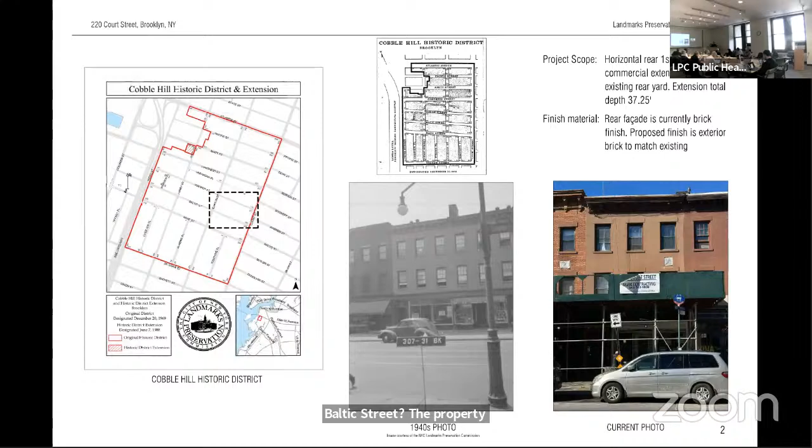My name is Handy Dimitri. I'm here to represent Sotir Associates in presenting this rear yard extension at 220 Court. It falls in the Cobble Hill District in Brooklyn, on the commercial strip of Court Street between Warren and Baltic Street. The property falls on the western side of Court Street, and on that strip we have more than 50% full extensions to the full property depth into the block donut.

This is an aerial photo showing the building. It falls midway on the block, and I don't know if it's visible, there's a little red block. I think we have a better picture coming up on this slide. This is the full depth to the south. The building has a 2 full story extension, not extending the full depth of the property. And on the right, there is another 1-story extension on both buildings next door.

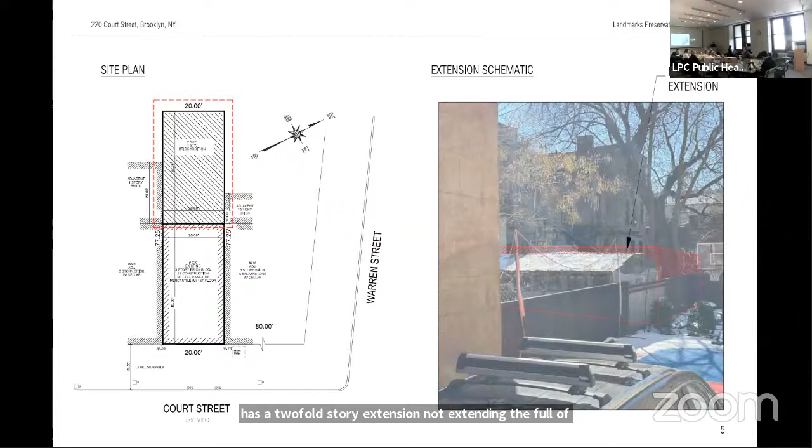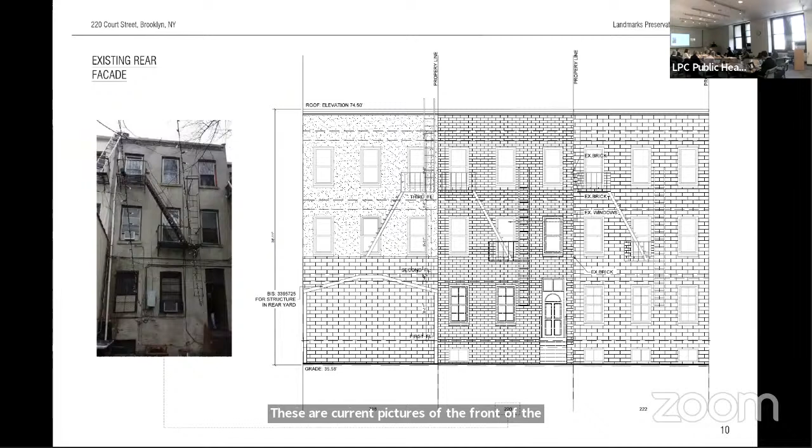This is the existing condition right now, and that's what's being proposed at 220. These are historic pictures of the front. These are current pictures of the front of the block, and that's the existing rear facade as it stands right now, with the proposed just extending backwards. There are no windows, they're all property line walls. And it's proposed to be finished with brick to match the size and color of the existing rear facade of the building.

There is zero visibility from Court Street and from the side streets as well, as we'll see. That's the existing plan, starting with the cellar floor to the far left, and that's the proposed.

That's a section through the building showing the railing on top instead of a full parapet, and a skylight down the middle to bring in natural light in the space. We have,

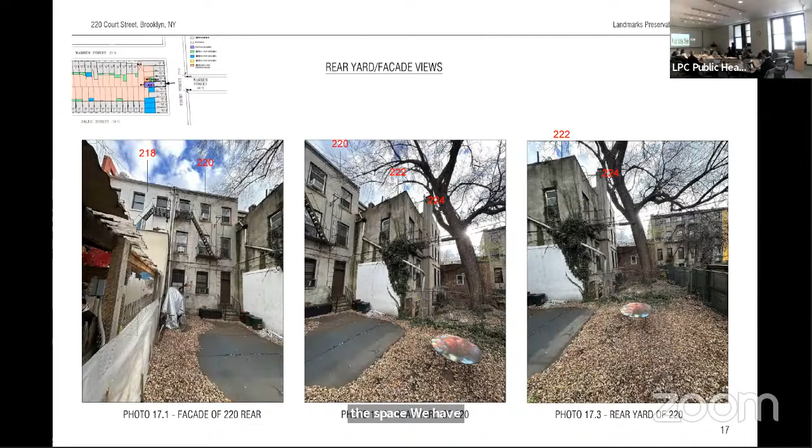These are the existing conditions of the rear yard right now. And that picture is taken on Warren Street of a gap in between the buildings. There's still zero visibility from the sidewalk because of the gate and the buildings, and then there are the other extensions on the other buildings coming on the rear yards of Court Street.

But the picture on the right is actually taken from the top of the stoop of the building that's on the picture on the left side, as high as possible to show that even at that level, more than 10 to 12 feet above the sidewalk, it's still not visible. It will be behind the shed and the extension on the left side.

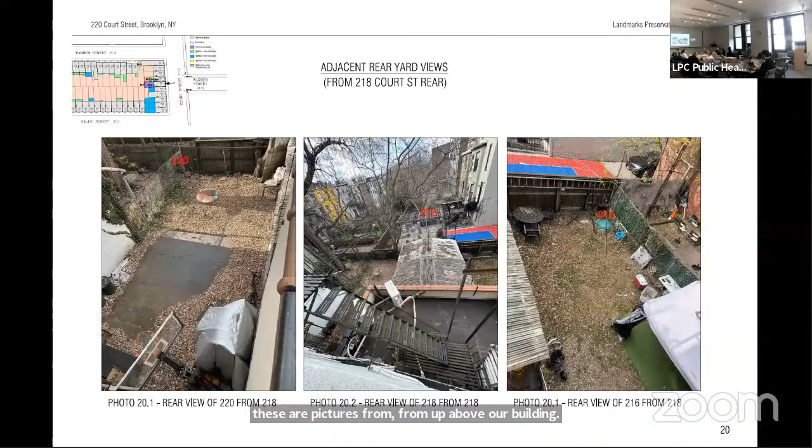Again, these are pictures from up above at our building. The picture in the middle is taken from the building next door, showing our rear yard to the left of it. And pretty much that's all. We have the wall types for the cladding and

Okay, right, yep. Any questions, commissioners? All right, and I know that there is no one in the room to speak on this, so let's see if we have any testimony on this one. Virtual testimony. Anyone joining us who would like to speak, please use the raise hand function. Seeing none, I will note that Brooklyn Community Board 6 recommends approval.

Okay, all right. So I think if there are no other questions, commissioners, we can move to our discussion. Is there anything you'd like to say before we do that? No, thank you. Okay, thank you for the clear presentation. All right, Vice Chair Bland, would you make a motion to close the hearing? So moved. Thank you. Commissioner Chapin, would you second that motion? Second. All in favor, say aye.

Aye. Any opposed? Okay, so this is a proposal for a one-story full lot extension, which is not visible from a public thoroughfare and is on Court Street, which is a commercial street. And so it's in a block where other houses have full lot commercial extensions as well. Commissioner Master, would you like to start this one?

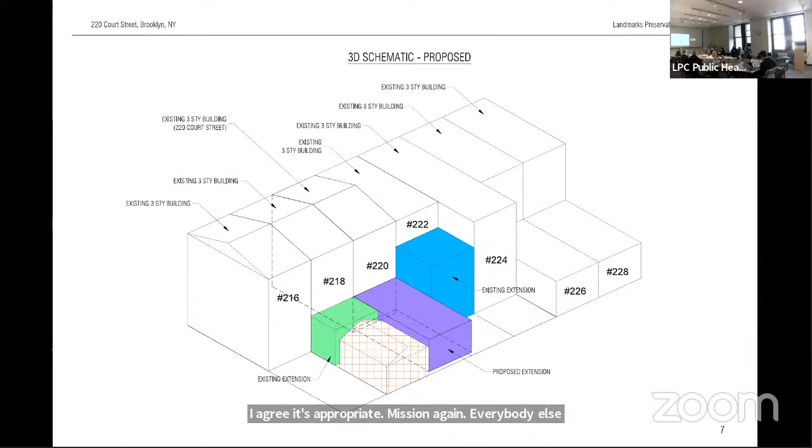We're going for commercial use. And the one wonderful thing they did was to put this huge skylight in, which I hope is huge, that brings light into it. Yeah. That's nice. Thank you. Great. Commissioner Goldblum? I agree it's appropriate. Commissioner Ginsberg? Appropriate. Everybody else agree? Any other comments? It's appropriate in context. All right, so Commissioner Master, I think we can make a motion to approve.

In the matter of LPC 25-03773, 220 Court Street in the Cobble Hill Historic District, a row house built in the early 1850s, application is to construct a rear yard addition. I note that the building's style, scale, materials, and details are among the features that contribute to the special architectural and historic character of the Cobble Hill Historic District.

I recommend approval, finding that the proposed work will not damage or eliminate any significant architectural features, that the rear yard addition will not be visible from any public thoroughfare, that the building is located at the end of the block along a commercial thoroughfare where there are other buildings with full lot coverage additions. Therefore, the work will not diminish the block's central green space,

that the one-story rear yard addition will not rise to the full height of the building, thereby preserving a sense of the building's original form and fenestration as part of a row, that the brick cladding and simple picket railing on the roof of the addition are in keeping with the materials found on rear facades throughout the historic district, and that the work will not detract from the special architectural or historic character of the building, the streetscape, or the historic district.

Thank you. Commissioner Jefferson, would you second that motion? Second. All right, Mark? Chair Carroll. Aye. Commissioner Bland. Aye. Commissioner Chapin. Aye. Commissioner Chen. He left. Okay.

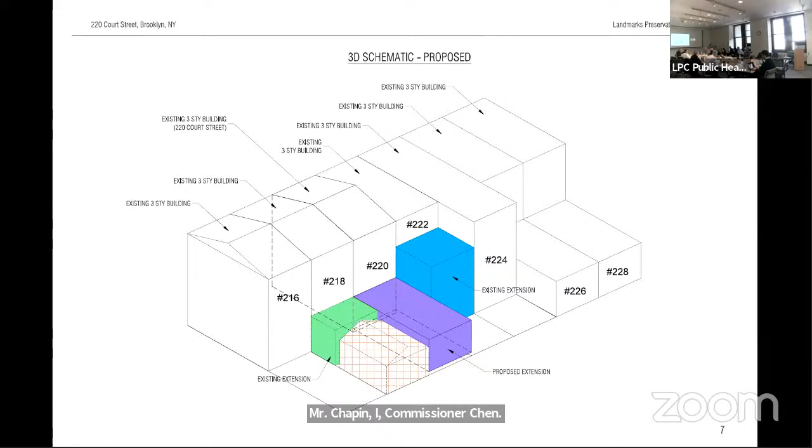Commissioner Ginsberg. Aye. Commissioner Goldblum. Aye. Commissioner Jefferson. Aye. Commissioner Lutfi. Aye. Commissioner Master. Aye. With 8 in favor and none opposed, the motion passed. All right, that's approved. Thank you.

And we'll move to the next two items. I'll go ahead and read both of those items in together since they're being presented together. We have public hearing item number 4, LPC 24-09716, an application for a certificate of appropriateness, the Borough of Queens, block 10299, lot 48, 112-24 177th Street in the Addisleigh Park Historic District, currently a vacant lot, and application to construct a new building.

And public hearing item number 5, LPC 24-09715, an application for a certificate of appropriateness in the Borough of Queens, block 10299, lot 48, 112-28 177th Street in the Addisleigh Park Historic District, a vacant lot. Application is to construct a new building. The applicants are on Zoom, so we'll have them present shortly.

The applicants are remote, so I'll just be giving them remote control. Yeah, the applicants, you now have control of the presentation. If you want to state your name for the record, you can begin. Oh, this is for me. Oh, hello, good afternoon. Good afternoon. Please go ahead. Okay, thank you. Yes, please state your name.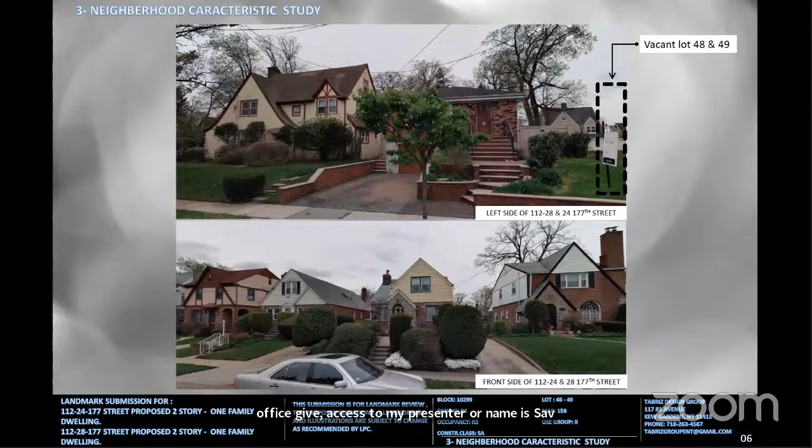I'm sorry. I'm just trying to get this. I didn't change for 20. You changed for 20? I think I do have. Ma'am, I do apologize. I'm not very familiar with this computer, and my presenter is off the screen. I'm getting someone who can help me. Can your kind office give access to my presenter? Her name is Saba. She's remote. We need to know the name so we can promote her into the panelist list. Yes, her name is Saba Benamara. She's now accepted and is in the hearing.

Okay. You can unmute yourself and begin. Can you pass the control over to that person? Yes, I'll change the remote control. Do I have to do it here? Hello? Yes, you now have control of the presentation. No, I'm not controlling. You just need to click on the presentation in front of you. Yes. Okay, I think I'm in now. I'm sorry. I do apologize for this.

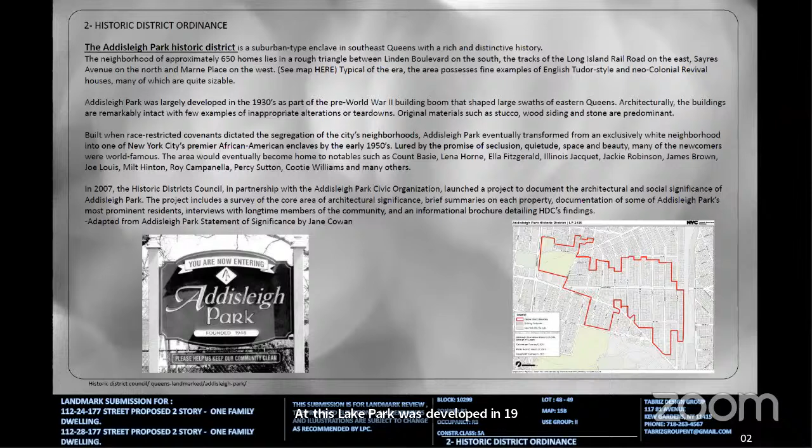So, good morning, commissioners. I do apologize for this issue. My name is Saba Binamara, representing Tabriz Group Enterprise and Architectural Office. I'm here to present our landmark submission for 2 single-family houses at Addisleigh Park. Our goal is to design homes that respect the historic character of the district. I just want to let you know that we have no objection from the community board hearing. So here, let's take a quick look at the history of the district. Addisleigh Park was developed in the 1930s and became known for its colonial style homes. It later became a significant African American neighborhood.

Yes, here, I'm sorry. Here I show a map of the historic district to define its boundaries and highlight where the project is located. Neighborhood characteristic study. So in order to understand the architectural language of the area, we studied many houses in the neighborhood. We analyzed and identified key elements such as materials, mostly stucco, brick, wood siding, and stone. Roof style, mostly hip roof, gable, and clipped gable roof. Windows, double hung, colonial style with decorative brick and half timber framing.

So here we have our project, lot 48 and 49, and this is the left side of our building, and this is the front side across the street, and here we have the right side of our building. The project site is currently a vacant lot, which has been subdivided into 2 lots, 48 and 49. So this is lot 48 and this is lot 49. Close-up photos, streetscapes. So here, to provide a clear understanding of the site surroundings, I have included close-up photos of 177th Street, showing the entire block, the architectural character and how buildings relate to the street.

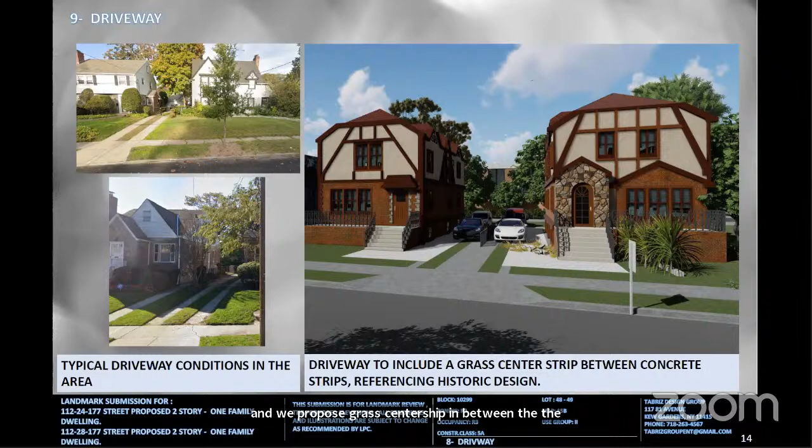Here, for the floor plans for the two houses, this is lot 48, and this is lot 49, with modern interior design, and the exterior we keep as historic as we can.

For the elevations, after analyzing the existing houses in the neighborhood, we found that most of them have two distinct exterior finishes, brick on the first floor and stucco on the upper floor. We maintained the same materials in our design, with red brick on the first floor and beige stucco on the upper floor. The beige color is as per 17546 Murdock Avenue.

For the roof, we have a clipped gable roof to align with nearby houses on Murdock Avenue, roof shingle similar to 11220 177th Street, Pella windows, colonial style with decorative grills as per 11235 177th Street, and the entrance design with brick and stone as per 11203 and 11207 177th Street, and stone border around the door and corner of the building as per 11215 177th Street.

For the second house here, we tried to maintain the same concept, except that for the entrance, we tried to make it a little bit different from the first house, where we're proposing a brick design entrance to match 11235 177th Street. I make a note here to show that the windows are placed without intersecting the half timber framing, so there is no direct interaction between the window and the framing element.

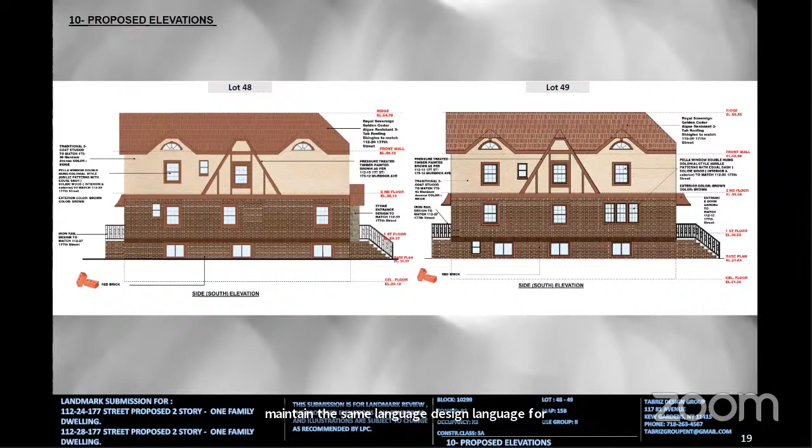For the side and rear elevations, we try to maintain the same design language for continuity and integration. This is the sky exposure plane, where we're showing how the building complies with the zoning regulation for height and setback. And here we have some axonometric views for both houses with the adjacent houses on the left and right sides.

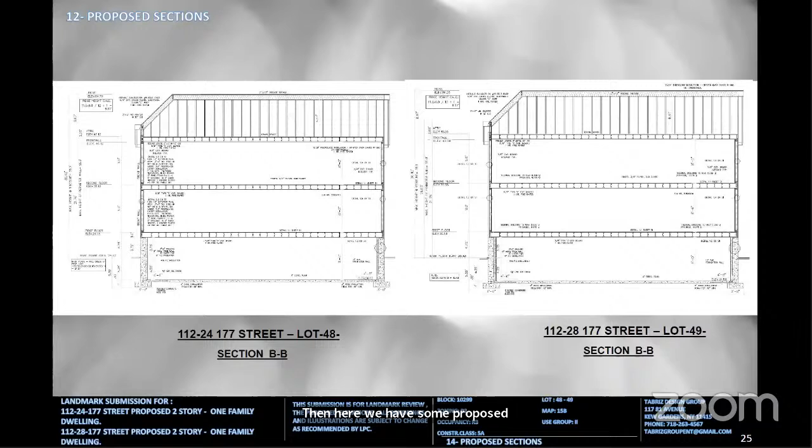Then here we have some proposed sections and some details for walls, roof and windows. And here for our materials, we are using cedar for window surround and wood composite for half timber framing.

Finally, this project honors Addisleigh Park's historic character while introducing two well-integrated new houses. We carefully designed them to reflect the neighborhood architecture and preserve its charm. Thank you for your time. I welcome any questions, and I do apologize for the technical issue.

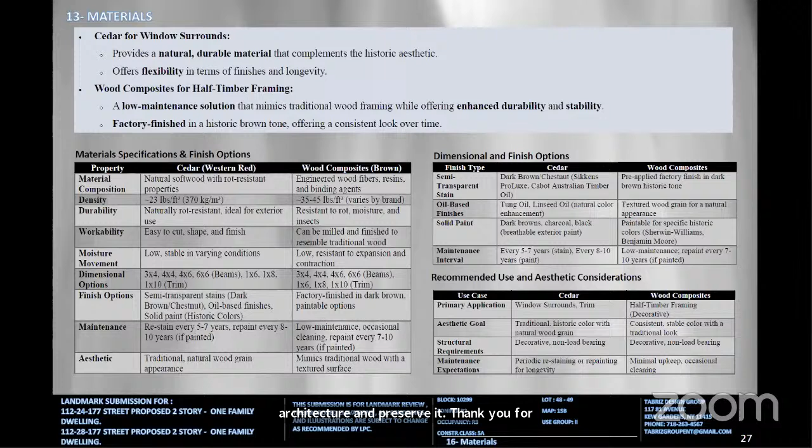Thank you very much. Do we have questions, commissioners? Yes, Commissioner Ginsberg. Yes, so I have two questions. First of all, on page 26, the window detail seems to show an insulated cavity wall with masonry backup on the left side, but on the right side, the exterior brick veneer wall seems to show brick with a metal stud backup and no cavity. This seems to be inconsistent. Can you explain that?

So for the window detail here, it's a brick veneer, and on this side here, maybe the scale is a little bit bigger, so it looks like masonry, but it is not. So I do apologize for this, and I will correct it.

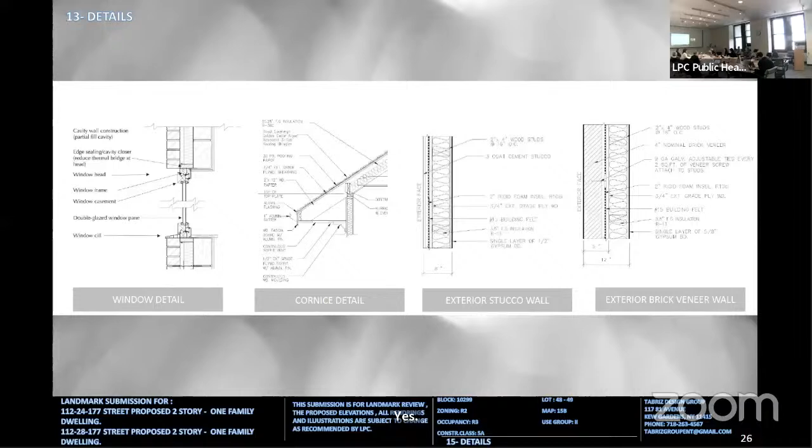Okay, my second question is to lower the height of the building. I realize there are some windows that might need areaways, but would there be any specific reasons why you couldn't lower the basement? The site actually, if we check, let me see which page, I'm sorry.

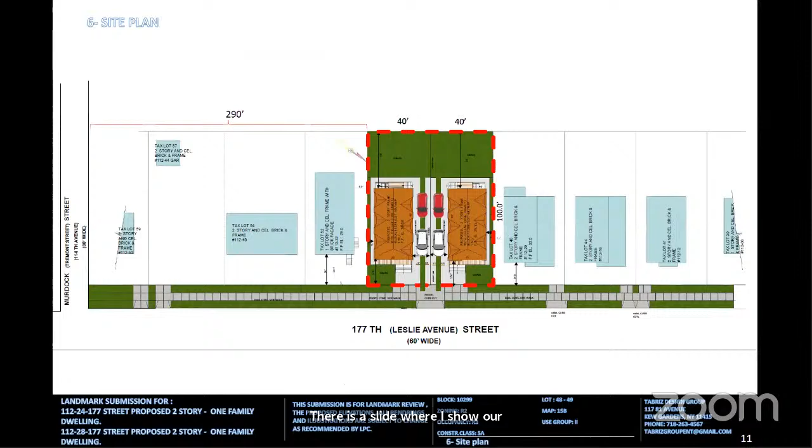There is a slide where I show our elevations for the adjacent buildings, so we have almost the same elevation. So here, for the first floor, it's 28.12, and this is 33. So this is a little bit higher. This is the adjacent building. Although the building on the left is significantly lower. Thank you.

All right, other questions? Okay. It looks like we don't have questions at this moment, so we're going to move to public testimony and see if we have anyone to testify on this item, and then we'll come back to you. And I will note that there is no one in the hearing room to speak on this item, so I will turn it over to Stephen Thompson to see if we have any remote participants. Thank you, Chair Carroll. Anyone joining via Zoom who would like to speak, please use the raise hand function. Our first speaker will be Lucy Levine.

Hi, Commissioners. My name is Lucy Levine. I'm speaking on behalf of the Historic Districts Council. HDC appreciates the applicant's effort to create contextually appropriate infill for Addisleigh Park. We think this application could be improved if the applicant gave further attention to the proposed pavement, porches, and roof lines. Specifically, we find the proposed pavement in the front areaway to be excessive for its context, and the front porches to be incongruous with the district.

Perhaps moving the porches to the rear facade would offer an appropriate solution. Finally, we feel the roof lines would be more appropriate if they were more steeply pitched in the neo-Tudor style. Thank you. Thank you. I see that we don't have any other Zoom participants, so I'll note that the Addisleigh Park Civic Organization recommends approval. Okay, so now I'd like to turn back to the applicant and ask if you'd like to respond to the comments we've heard.

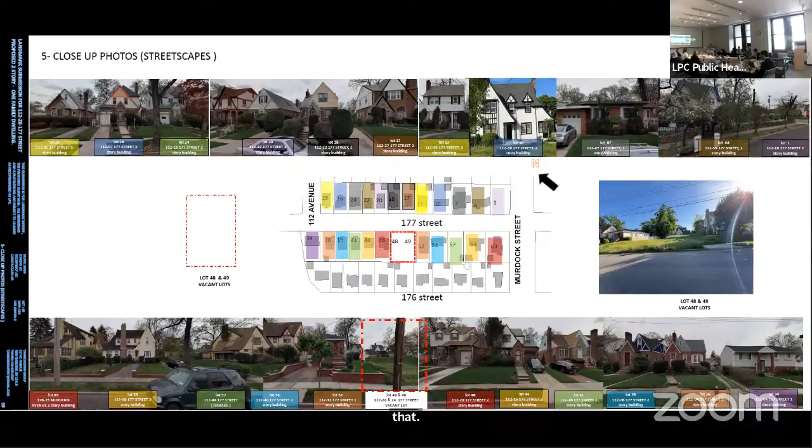Commissioner Goldblum? Yeah, just talking about that kind of white colored concrete patio that you've got on the front and side of the two houses. What's your thinking on that? Is that like a deck to kind of hang out on? I'm sorry, the rectangular white things? Are you talking about the axonometric views here? Why don't you go to page 22? You can see them pretty well there. Big kind of mats in the front and they run down the side. What are those? No, it's a rendering issue. So we have only this part here for the stairs and all is grass. I'm sorry for that.

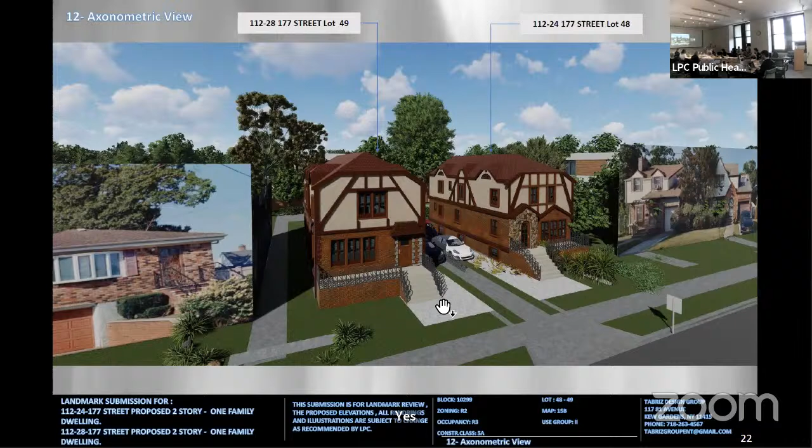So the building sits in a grass field except for that little rectangle in the front that would be cement? Yes. Okay, so where you have the car shown towards the back, that's really a little paving strip and then grass? Yes. For the driveway, it's concrete except for the center. We try to maintain this grass to make the maximum that we can as grass area. Got it. Okay, thanks. You're welcome. Thank you. Other questions? All right, I think we can move to our discussion. So we're going to now close the hearing and then we'll have a discussion and we'll explain the outcome of that discussion.

So Commissioner Vice Chair Bland, would you make a motion to close the hearing? Thank you. Commissioner Chapin, would you second that motion? So moved. All in favor, say aye. Aye. Any opposed? Okay, so the hearing is closed and we'll begin our discussion on these two new buildings on vacant lots in the Addisleigh Park Historic District.

They are sort of designed in a neo-Tudor style, and the applicant showed other early 20th century revival styles that are found in this historic district. And they sit with a shared driveway with a grass strip in the driveway, two grass strips. And they seem to be brick and stucco and wood trim and some stone. So Commissioner Goldblum, would you like to start?

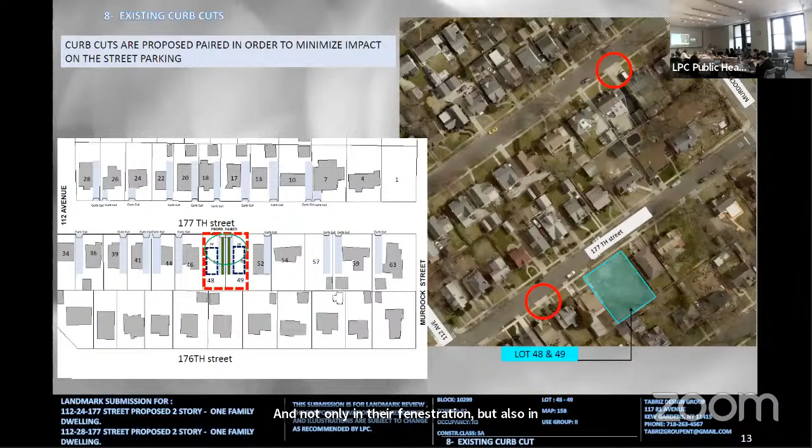I would guess that most of them, like the ones that I see on the block, are pretty asymmetrical, not only in their fenestration, but also in the kind of suggested massing. You know, there's a kind of a big gable to one side and then a cross gable to the other side, which you can see on the bottom left, and on the top left, and on the top right. So yeah, I think there's a kind of a pattern there that they could look at that would give it a little more three-dimensionality, a little more variety to the facades so that they would kind of feel better on the street.

I think they could look at color variations as well. You don't want it to look like we kind of had a row here and then somehow the row got erased. I think that the front porches are unusual on the block as far as I can tell. I think one of them might be okay, but two of them might be too much because, again, it kind of gives you that pattern effect.

And I think that the height, even though there are one or two houses that do have relatively high stoops, I think that the bulk of the houses seem to have a lawn that kind of rolls right up into the house with maybe one or two or three steps at most. So I think they should have a good look at that with staff. I think that the paving in the front, to the extent that it's a mistake, that's good. Because again, looking on the block, it's mostly lawns with a walkway towards the front.

I think the idea of using a grass strip instead of a driveway is nice. They might consider that for down the middle as well, because it kind of has the effect now of, I mean, I know what they're trying to do.